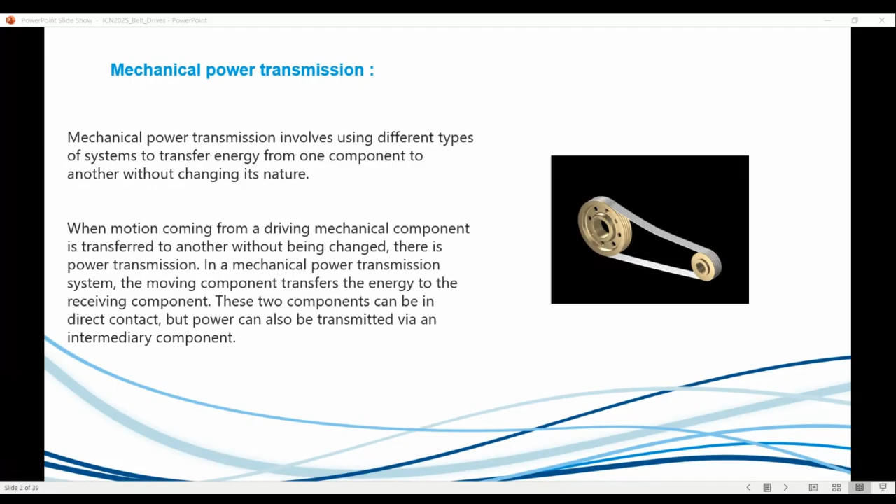Before we start with belt drives, I just want to discuss mechanical power transmission. So what they say, mechanical power... is she saying something? Ready now? Yeah, that's the best way. Really go over the slides first and then practice the questions. It's literally that simple. Don't make things too complicated.

So mechanical power transmission involves different types of systems to transfer energy from one component to another without changing its nature. That sounds a bit funny. When the motion is coming from a driving mechanical component, it is transferred to another without being changed - there is power transmission, right? In a mechanical power transmission system, the moving component transfers energy to the receiving component, right? These components can be by direct contact or can also be transmitted by an intermediate contact, right?

So we transmit power, right? We want to transmit power from one place to another - this is particularly mechanical power. How do we do it? Of course there are ways that you know, and we can use, for instance, positive drives. We talk about shafts as one way to transmit mechanical power. You can use flange couplings, gears, and dog clutches - that's another way. But let's get into this.

So a typical mechanical drive is bifurcated into two types: the friction type, and your positive or mesh type. Your positive types are like your chain drive and gear drive - shafts are also part of that, and your dog clutches, they're positive. And then your friction type - the friction drive is based on the principle of friction, which means friction types are more likely to slip. Essentially, from the friction drives, the very common ones are your belt drives and your rope drives, right?

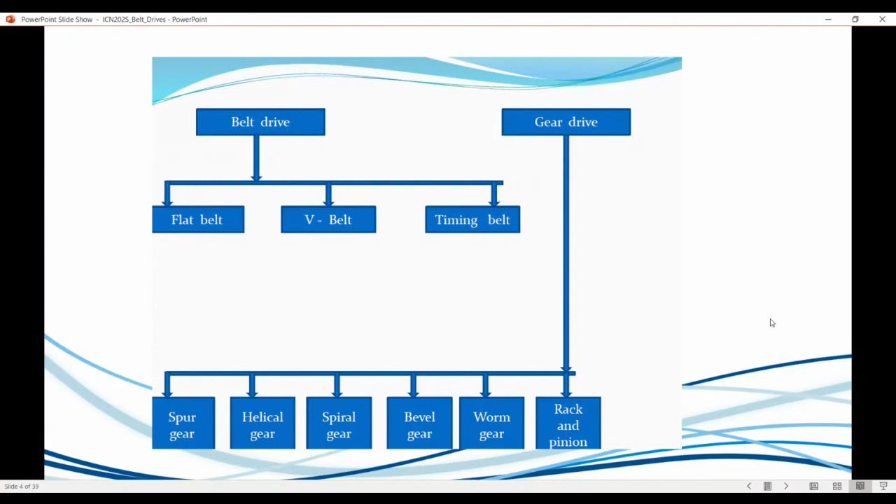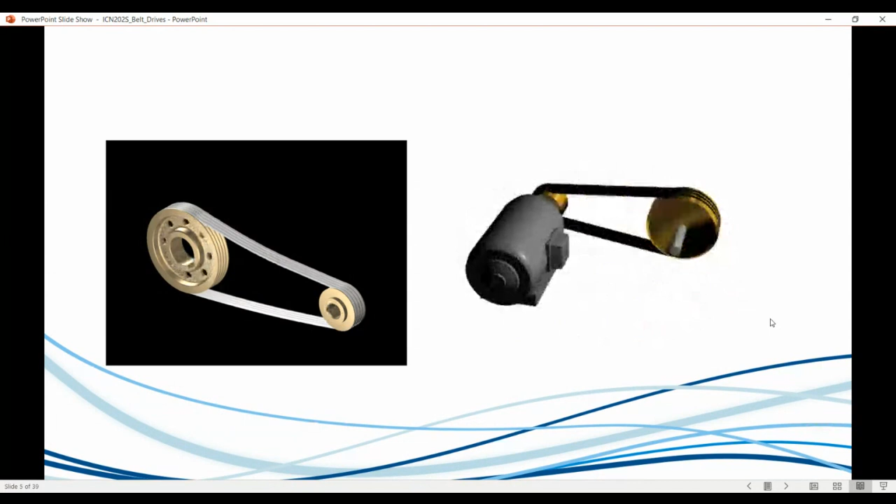It's just showing the tensions, and of course to drive it, and on the right hand side it's the same arrangement, but of course to turn it we need a motor. Turn the driver pulley, and then what we call the small pulley again. Why small? You know, the driven pulley, the driver, the driven pulley. Right? You'll get back to the terminology again.

But the idea is that the motor's transferring power to the small pinions, or arguably pinion, which I'm thinking in terms of gears, and then to the bigger one. Right, so just transmitting power.

It's more into, okay, so different types of belts. Before we actually get into all the analysis, just things that are important to go over this. You've got your flat belt, you've got a V belt, and you've got your rope belt. So those are the 3 things we're actually looking at today.

And they say flat belts are mostly used in factories and workshops. We have a moderate amount of power to be transmitted from one pulley to another, when the 2 pulleys are not more than 8 meters apart. So that's very important. So if you ever want to transmit power, you just can't use any belt.

There are conditions. The V belt is mostly used in factories and workshops, just like the one before, and exactly the same. And they say you use a V belt when the 2 pulleys are near to each other. So that's when you prefer to use a V belt compared to a flat belt. Maybe we can find out why.

And of course, you've got your circular rope belt, and this is more interesting. The circular rope belt is mostly for factories and workshops too. Same thing again, we have a great amount of power to be transmitted from one pulley to another, but with the 2 pulleys more than 8 meters apart.

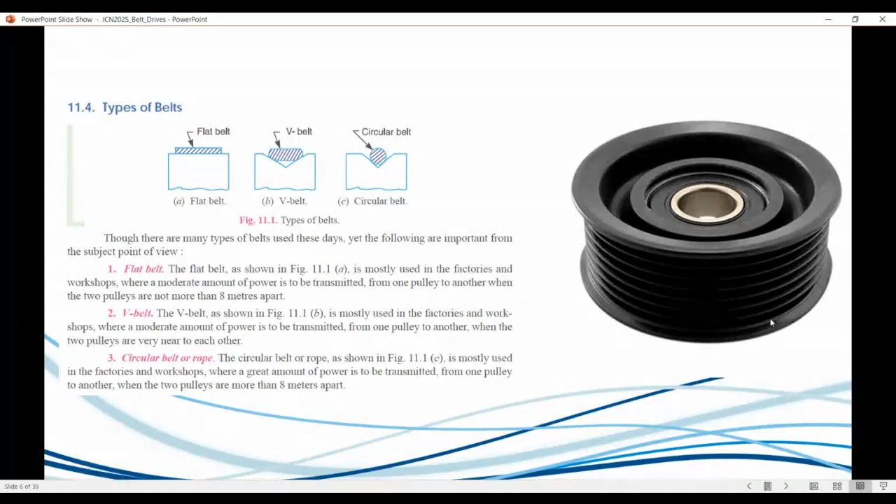Of course, you've just got a typical pulley arrangement in there. Got a pulley over there on the right hand side, it's like an idler pulley. It's got different grooves, and the grooves are there so that it can grip on the belt. It's just a side picture there.

For the materials, this is really just for information's sake, nothing worth going into detail. It's normally leather, rubber, canvas, or balata. But the idea is that it's all to do with having a good coefficient of friction. This is just also for more information's sake, I will not ask you what types, but just what type of material. The idea is where this all ties in is that it's about the coefficient of friction. You want something with a good coefficient, right?

Let's look at the advantages of using belt drives. They are easy to install and remove, as anyone who's done basic car service would know. The price of belt drives is low, that's true. They're simple in construction, maintenance cost is low, and no additional lubrication is required, unlike gears which probably need lubrication.

Power consumption is low. What they probably mean is that the mass moment of inertia of the system is low. When we talk about gear drives, gears, and even clutches, have a big mass moment of inertia, so it takes more energy to rotate.

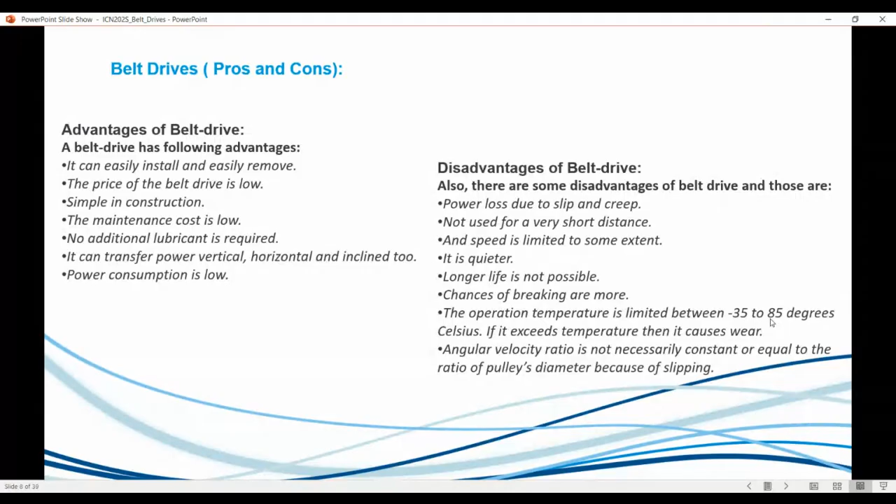I'm sure you're aware that the linear velocity, even though the angular velocity is not constant depending on the diameter, the linear velocity itself is also not actually constant. That's because of slip.

Now just comparing to other systems. The main elements are slip, suitability, and space. Belt drives have pulleys and belts, and slip may occur, unlike chain and gear drives where there's definitely no slip. Belt drives are good for large distances, but of course it depends on the setup. They require large space - it's the simplest system actually. Failure of belts does not occur severely.

That's a very important concept with belts. When a belt breaks, it doesn't cause severe damage to the machine it's transmitting power to, but with a gear drive you can end up with several problems. So that's a nice thing about belts - it doesn't affect other components. Life, in comparison to gears, is less - it's going to break quicker. Installation cost is less, and it's used for low velocity ratios.

The faster you want to go, ideally you want to use gears, and that comes down to centrifugal force. When you're spinning something, you get an extra force acting on the system.

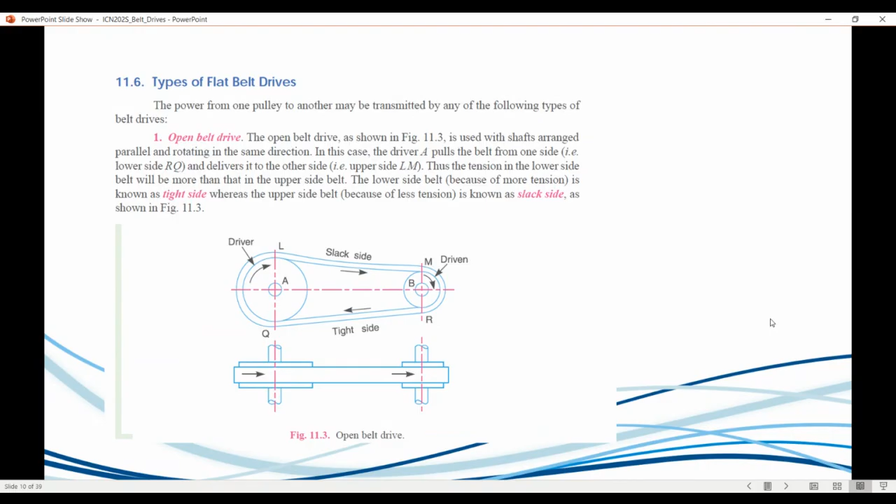And then we're going to set up a cross belt drive for whatever that is. So that's also a very interesting thing to kind of identify which type of belt you should use.

There's also other types of belt drives. Unfortunately for us, we won't be doing any analysis on this. So you've got your quarter turn belt drive, which was more for incline purposes. And we also have a belt drive with a single idler pulley. You might see that, it's not something I'll always bring up. Basically, the angle of the idler is going to increase the angle of lap. We might do an example of that, but I'm not really focused on it.

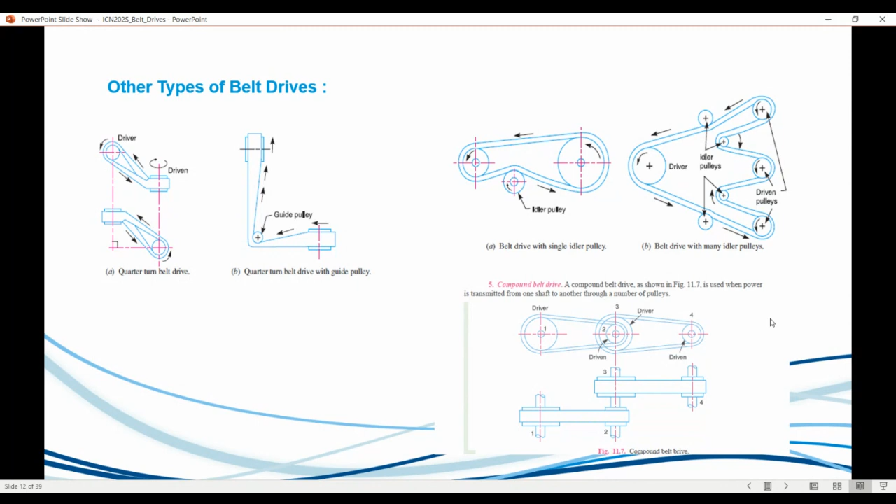And of course, we've got one of many idler pulleys, it's really sophisticated. Then we've got a compound belt drive. We have a driver, there's 3 shafts over there. I'm not particularly sure why one would want to transmit power like that, but okay, it kind of shows you at the bottom. Essentially it has 2 belt drives parallel to each other.

All right, we're nearly at the example. So, velocity ratio of belts. This is something familiar to you.

What you basically assume is that the linear velocity is exactly the same on the drive and the driven pulley. Show you the relationship pi dn, or pi dn over 60. The idea is that you make that equal to each other, and then pi divides out, becomes 1, and then you have some kind of ratio. So without slip, the velocity ratio, the rotational speed N2 over N1 equals D1 over D2. You could call D1 the driver and N2 the driven. But now it's important with belt drives, we have to include the thickness of the actual belt, because that adds to the dimension of the actual pulley.

Now, this is not always the case. I think I probably have a small example for that somewhere here, but I can't exactly tell you how much percent it is. To be honest with you, it's arguably negligible, but I might do an example to illustrate, or show you an example just verbally. But anyway, we do consider it to make the results more accurate.

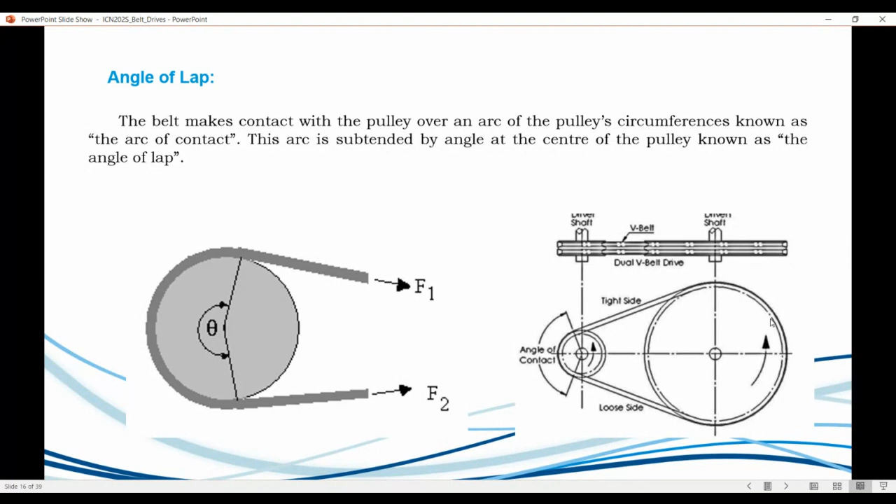So that angle over there, basically where the pulley is, around the circumference of the pulley, the belt surrounding the pulley, that is going to be the angle of lap. You can see on the right hand figure over there, it's exactly the same. That's just angle of contact, angle of lap, same thing, just to make you aware of this terminology.

Again, with open and cross belt, there are more formulas, so total angle of lap and the length. What's important to note here is that, let's say in an open belt drive, the diameters of the pulleys are not the same, the angle of contact of the two pulleys are not the same. So what we tend to find is that the angle of contact on the smaller pulley, which is now D2, is less than 180, as compared to the larger pulley that's greater than 180. So what's important about that is that slip will occur first on the smaller pulley.

When we're doing our analysis or calculations, we always have to use the angle of lap on the pulley, because slip occurs there first. If slip occurred on the driven pulley, then we don't have the angle of lap. So let's just get more information there.

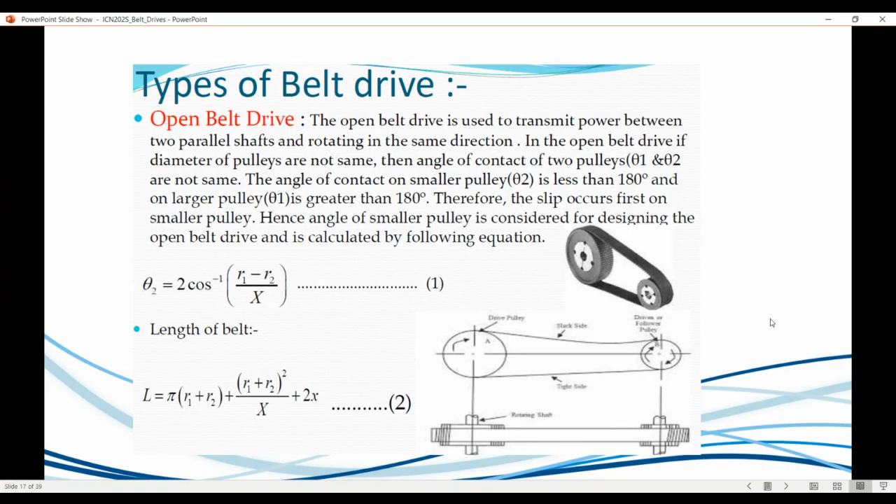So that'll be negative. Theta equals 2 arccos R1 minus R2 divided by X. X is the total distance between the two shafts. You'll get that. I didn't actually mention the variables, but yeah, it's fine.

For cross belt, again, the same thing but two different directions. Same as before, the belt crosses each other, and there is a lot of wear and tear. This type of drive should be used for larger distances between two shafts and for lower speeds. In this case, your angle of contact for both pulleys is the same, even when the diameter is not the same.

So here you can just find, it doesn't really matter which one we have to use. You can just find the angle of lap for this, and then we can get that. All right, so here we go.

So is there any questions so far? I think that's a lot of information, but is there any questions? Any unclarity?

Students, they're still sleeping. Brent, Mr. Silver, Ivano, Matthew, Doyle, there you go. Tommy, you guys awake? Yeah, thought so. No, I'm awake. I'm awake now, yeah. Great, okay, no, just information guys, just relax, I'm nearly there. Yeah, it seems like I'm not nearly there. Oh well, no, I am.

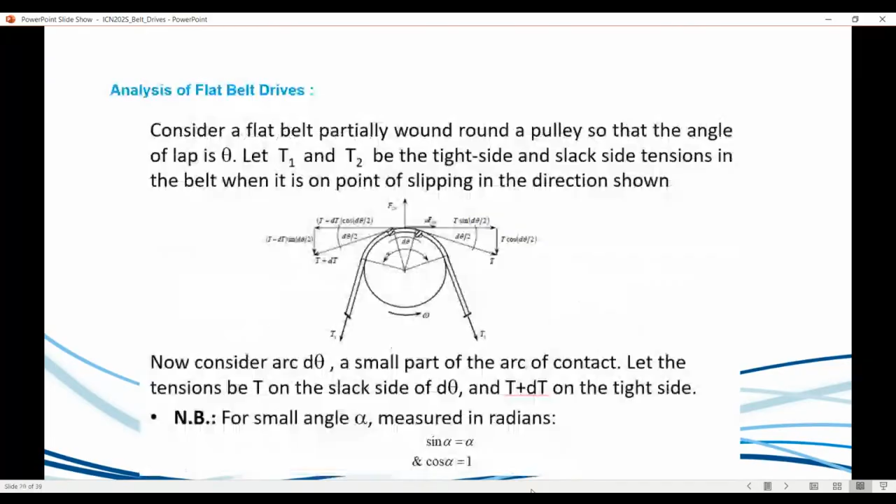But the idea is that you look at all the radial forces, forces to the left and right, the horizontal, and we get the tangential force, which is all the vertical forces. And of course, that will give you, in this case, the frictional forces, the tensions at this particular angle on the one side. Just basically considering a small angle, we're going to end up with that model over there. So that's a very important equation.

The tension T1 over tension T2 equals Euler's number E raised to the coefficient of friction times the angle of lap. All right, very important.

But now, because we're dealing with a rotating system, you've learned of a new force. The centripetal force, or centrifugal force, which will be the inertial force of the centripetal force. We have to take that into account when we're doing analysis. So what does it say? This expression, the one above, does not take into account the centrifugal tension. For low belt speeds, Tc, which is now the centrifugal tension, has little effect on the power transmitted.

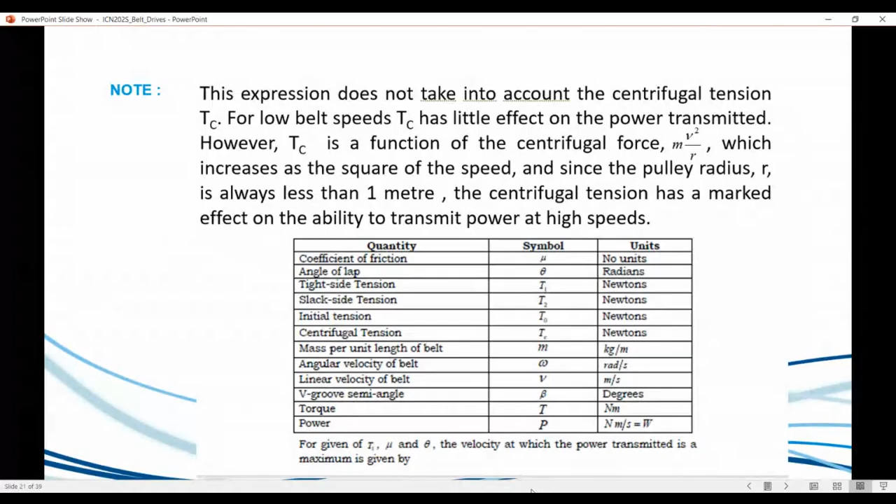So what do we basically do now? Let me go back to the same model: T1 over T2 equals E to the power mu times the angle lap. All we do is subtract Tc from both T1 and T2. Very simple, we're just adding that now. To compute the centrifugal tension, it's basically mass times velocity squared. I'll come back to this because what's supposed to be here is a power theta.

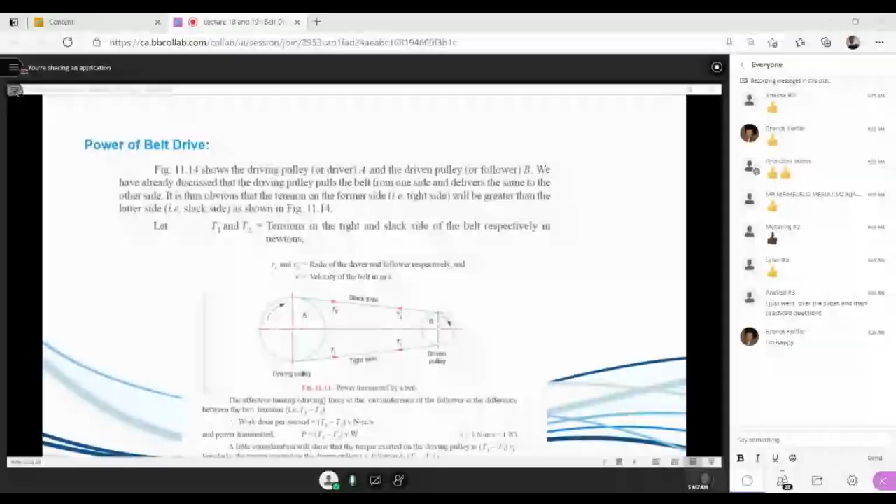Sorry about that. So what's important here is the power. As marine mechanical engineers, you always want to talk in terms of power or watts. So what happens here is we're getting torque, and we normally multiply it by omega. In this case, we can just go force times velocity. This is a nice illustration again.

So we have the driving pulley and the driven pulley - no, wait, what's driven? The small one's being driven in this case. I'm getting a bit confused here. Nevertheless, to find the power - so the driving pulley is the bigger pulley here. Just bear with me until I get all that in order.

As it rotates on the top side, you get the slack side - there's lesser tension compared to the bottom side, which is the tight side. Essentially to find the power, that's going to be the difference of T1 minus T2 times the velocity, which will be your linear velocity, and that will give you your power.

Okay, so just to recap all of this, what's important here is your new model for calculating the tension in the belt. So T1 over T2 equals E to the power mu times theta, and that gets now modified with centrifugal tension. So we have T1 minus Tc over T2 minus Tc equals the same on the right-hand side. And of course, what we have to do now, same with our power.

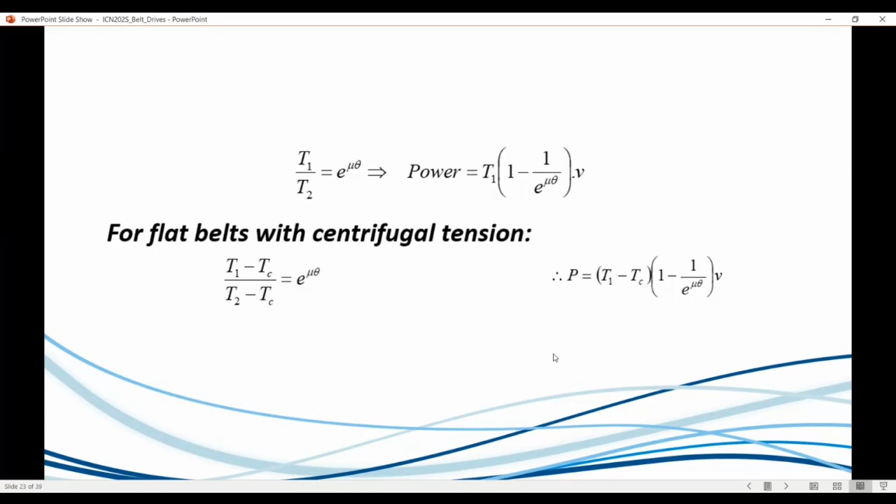Let me just quickly show you how this is a convenient form to use, which you kind of use a lot. So we said power - I hope you guys are finding this color okay. I never talk this much, you guys. We normally do an example, but it's fine, it'll all be worth it.

Power equals T1 minus T2 times V. I'm just illustrating to you how we get this formula. So T2 would be - so T1 equals T2 times E mu theta, and then we divide this out, and then we have this. So T2 is equal to T1 over that piece there.

Just want to move on. So power equals T1 minus, substituting that in, T1 over E mu theta. Just a quick illustration. Of course, we can take T1 as a common factor, so we have 1 minus 1 over E. This is normally a convenient form because all you have to do is basically find your first tension. Sometimes it's given, sometimes you have to work it out, and you go 1 minus that.

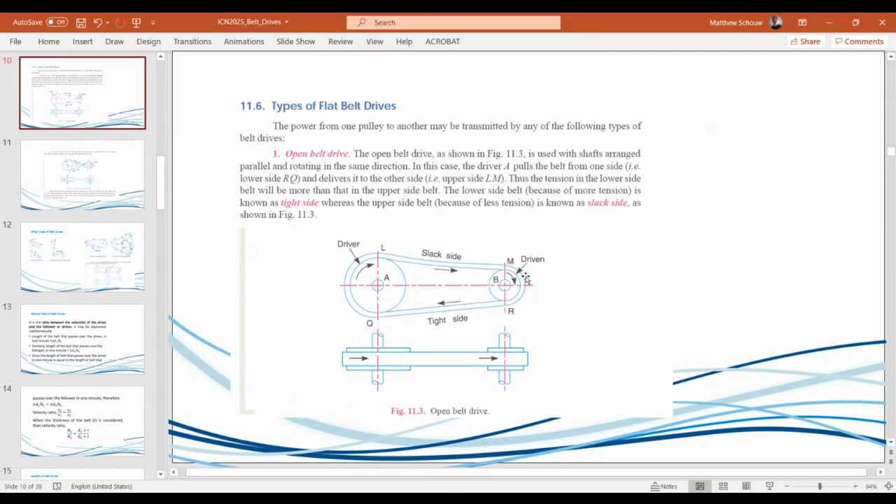So the big one is the driver pulley and the small one is the driven pulley. I'm not sure why I would think it's the other way around, but let's go with big is the driver and small is the driven one. We'll just keep it like that for now, and you'll figure it out.

I just lost my train of thought. Okay, so there's your first example in the book. I'm just opening my whiteboard. If you have your formula sheet next to you, I recommend getting it out, because that's your bread and butter. All you have to learn from this section is how to apply the formulas. It's really a nice section if you understand what's going on.

I give examples because it's easier to express oneself with examples versus words. This is the first example, on 512 in your notepad, and it comes from the book. I'll show you the stuff here. You need two questions, right?

Question: two pulleys, 450 millimeters and 200 millimeters in diameter, mounted on parallel shafts 1.95 meters apart and connected by a flat belt. A) Find the angle of lap between the belt and each pulley, and the length of the belt, if motion is transmitted by an open belt - so we know what an open belt, flat belt, open type arrangement looks like. B) How much power can be transmitted when the larger pulley rotates at 200 revs per minute, if the maximum permissible tension in the belt is 1 kilonewton and the coefficient of friction between the belt and pulley is 0.25. Then repeat exactly the same for a crossed belt.

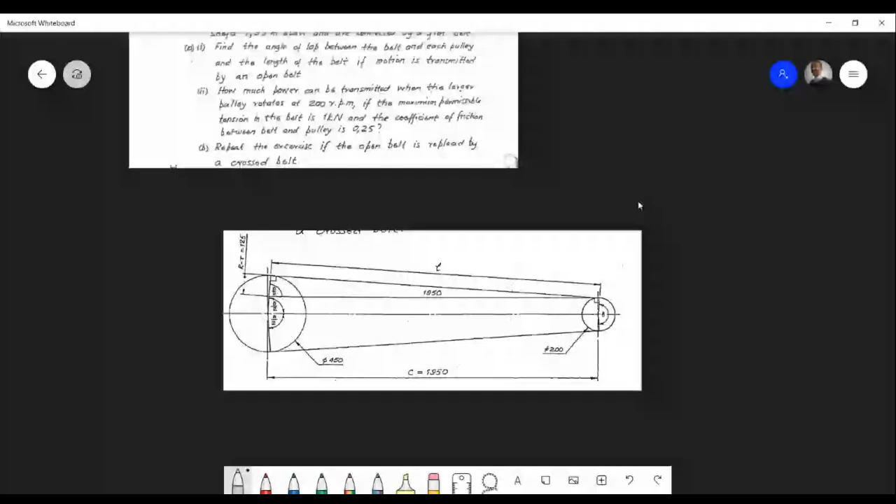Okay, so this is what our arrangement will look like. There's a picture here. So we've got a big pulley, so-called the driver, and the driven pulley. We've got the center distances - that's very important - and we've got the diameters over here.

So like I mentioned to you, our objective for this particular problem - I'll back up now - is A, the angle of lap, and the length. So conveniently for us, we've got the two formulas there.

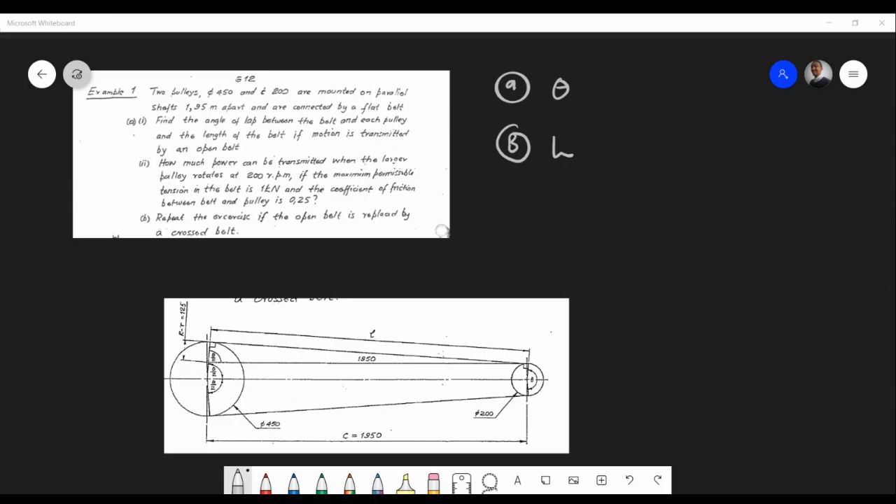Where are they again? So this should be negative. You need to know how to use each one, essentially. Okay, so that's for the length. Of course, for this, we have to use the other one again. Let's snap that also - fairly easy.

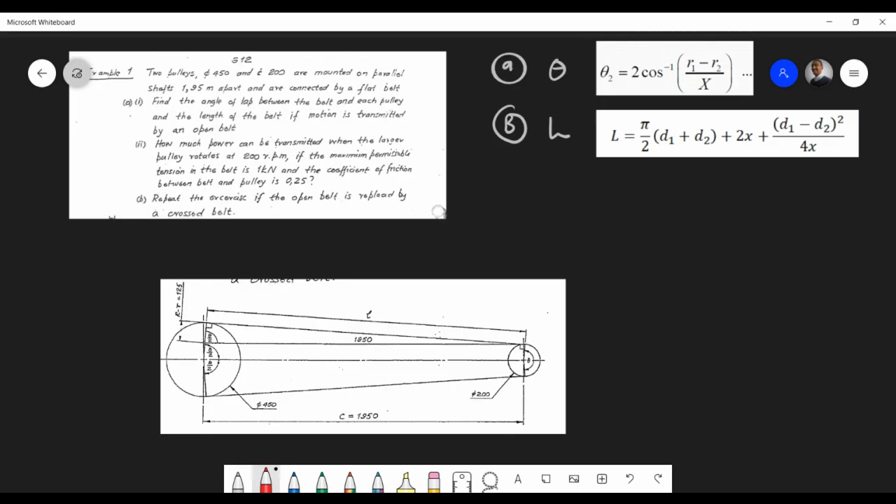Let's just quickly look at what's happening here. Alright, so simple, right? Plug and play. So just for understanding of how it all comes out. Remember I mentioned we have to use the angle of lap on the smaller pulley - slip is going to occur here first. So we're always looking for theta.

Whatever theta is, theta, what we're looking for is that. So how do we find it? What they actually do here: if we have a right angle triangle essentially, and we use the distance of the driver pulley - it's going all the way up - and then we subtract the distance of the smaller one, which is that over there, and then we're left with this, the radius of the smaller one, which is that. Then we're left with r minus r.

Simple tricks again. So it's opposite - sorry, this is my adjacent side. Adjacent is over here, hypotenuse is over here, right? So, but of course this is only half the angle on the other side. So what it actually looks like is we can have it like this.

So let me just shift to A. Cos... what am I doing here? So it's cos theta over 2. Remember, it's always going to be the smaller one anyway. Then that's going to be big R minus small r over C, or Cx, all the same thing. X is just the distance between the two shafts. So to find the angle of lap...

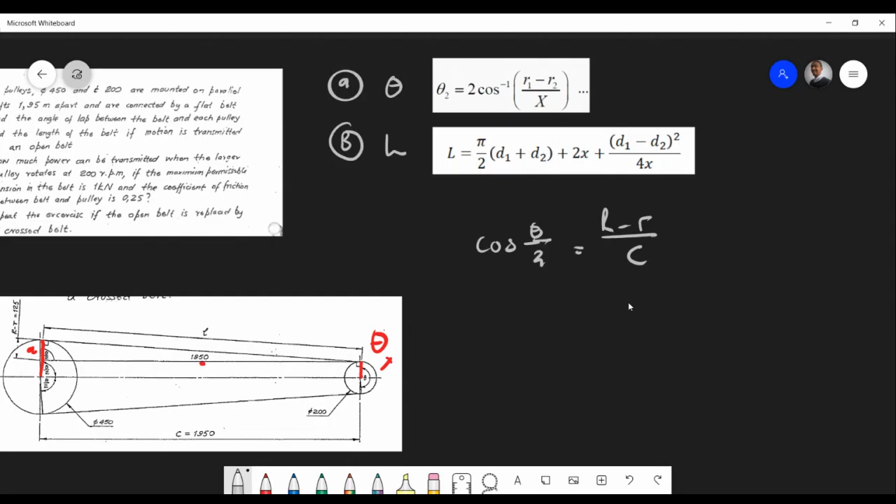Just give me a second. We can use the radiuses, radii, of the two pulleys.

So the first one, that's 450, divide that by 2, you get 225, I think. Minus the smaller one, that's 100. And then it's divided by the center distance. So that's going to be 1.95, right?

Remember what's important is this is only for an open belt, right? If you deal with a cross belt, the formulas look the same, but a few signs are going to change. Just be aware, so know what to use for what particular situation.

All right, so can we just quickly compute that? That's 64.102. Are we allowed to do that? Am I on the right track? I feel like I'm off somewhere. What's my angle? It's 1.95. What am I... I feel like I'm looking here.

Just to see, just give me a second. Oh, I see. Just bear with me. She's supposed to be in millimeters, that's why. So that's what it is. Okay, there we go, got it. I'm using all in millimeters, and we should get 86.

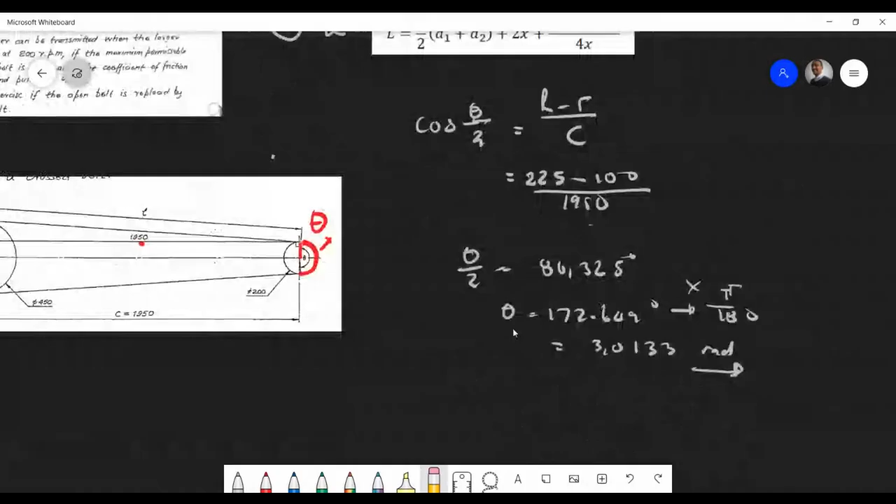Okay, the next thing is to find the length, right? So now, yeah, I gave you a nice formula. Fortunately for you, you could have done it the other way, and the other way is essentially looking at... I just want to show you, so you don't...

We take, we add this length from here to here. So we have this length from here to here, the length of the belt here to here, there to there, and then we add on the driver pulley, and then over here we add that length from here. So of course this is going to be S equals radius times that. That's also S equals radius times that, and of course here we have the two lengths, so I think that's 2L.

So one way of writing it out, and I'm not using the formula now, it's going to be length equals 2 times L, plus R times theta, which is the small side, plus big R times 2 pi minus theta, which is of course 360 degrees. So just looking back at this, so it's the length here, 1, 2 for the top and the bottom. The smaller pulley, of course, that's R times theta, which I've done there.

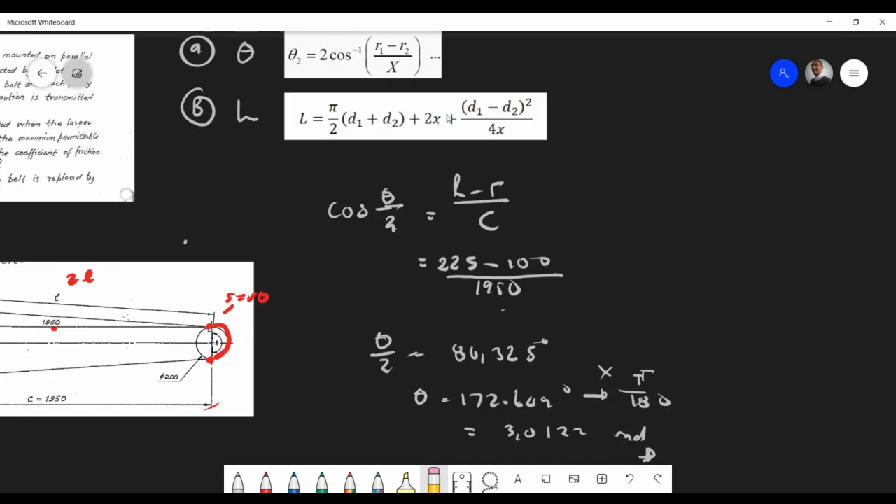And of course on this side, because we're looking at this angle now, we have to say, of course, 360 minus whatever that is there. So that's one way of doing it, right? But simply what I find acceptable is you can just use this value, which is essentially the same thing as this over here. So I like you guys to find the length of the belt for me. So of course over here, that's your two diameters, and that's your X, which would be your center distance, C or X. Depends on what you want to call it, C or X is perfectly fine with me.

So can you just quickly find the length? So you have the two diameters, you've got X, which is the distance, and let's see what you get for your length. Let's see what's close enough to what they have over here. Okay, I'll give you guys like 2 minutes to do that.

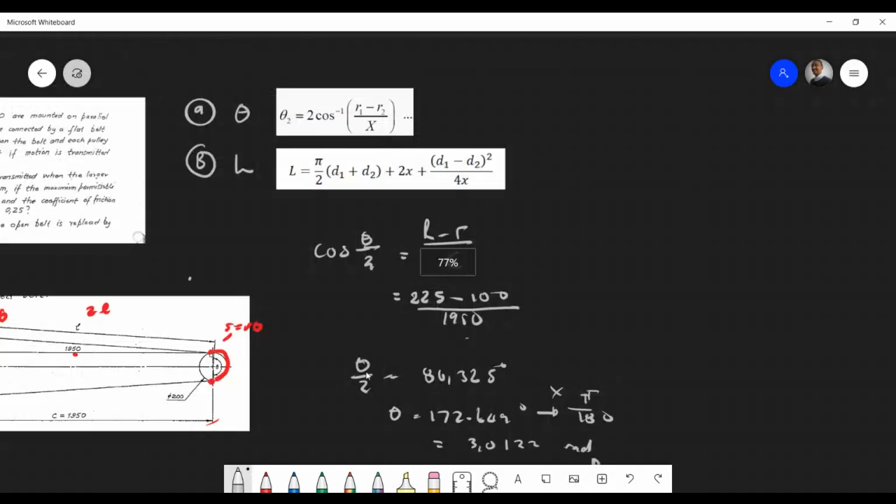But what I want to touch on now is where we need to get the meat and potatoes of this thing. So at number 2, I'm labeling this A and B - not the correct labels, but let's just get it right. We get the idea here. Number 2 is how much power can be transmitted with a larger pulley.

It's telling you it rotates at 200 revs per minute if the maximal permissible tension in the belt is 1 kN. So where we're heading is power equals T1 minus T2 times velocity. We can change this up and say T1 times 1 minus 1 over E mu theta, times velocity - force times velocity, if you're ever wondering what's happening.

Of course, what we need to do now is find the individual things, the velocity and that value. So what we normally do is say T1 over T2 equals this. If you want to do this, T1 over T2. So we know E, what's our coefficient of friction? I think it was 0.25. And our angle of lap we've worked out, but remember it must be in radians, and we have it in radians, and that was 3.0133.

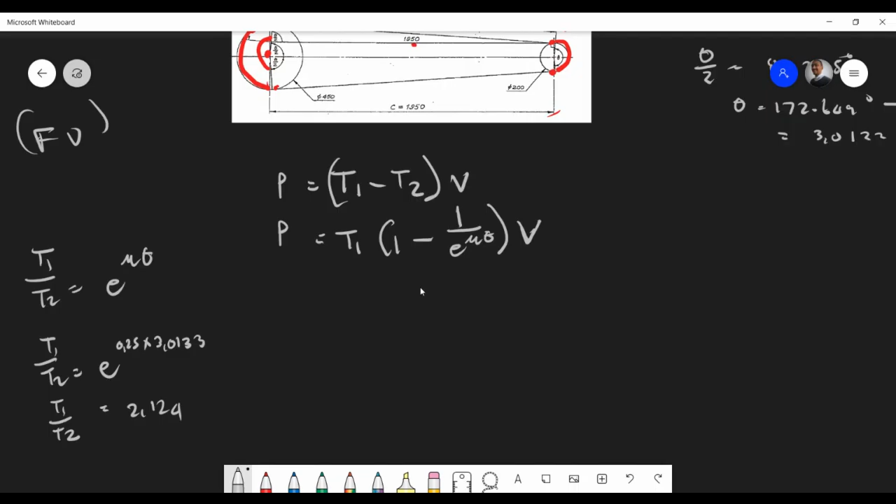How do you think? The tension - oh, they say the maximum. They really want the power. There's nothing else to want. So now they say the maximum tension in the belt is 1 kilonewton, and of course that's going to be on the tight side. So it doesn't really matter where it's rotating in this case.

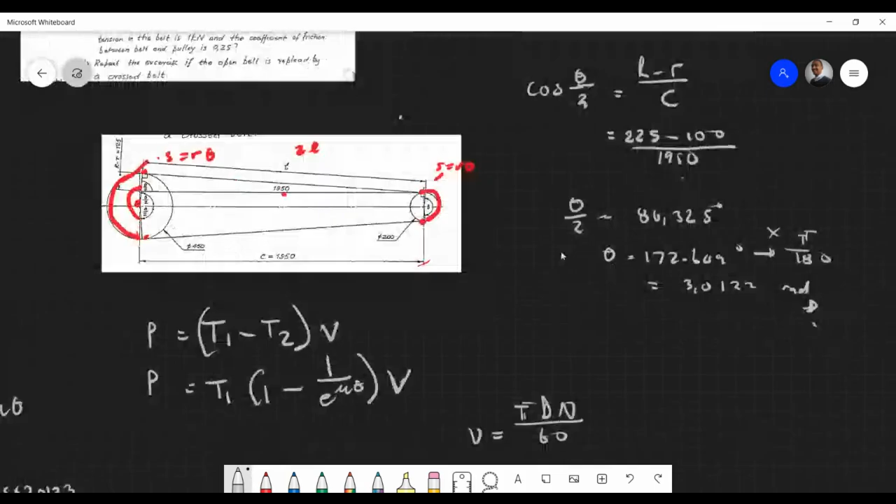But all we have to do, and what we're missing here is one more thing, and that's the velocity. Let me just write the velocity here. So we of course know pi d n over 60. So it's pi times - they said the larger pulley is rotating at 200 revs, and that's at 450 millimeters, over 60. And then we can get our velocity. We can quickly do that. Wait, give me a second.

Something is - oh, times 10 to negative 3. So pi times 0.45 times 200 over 60. That's 4.712... 2.3, right, or 2.4. Acceptable, that's acceptable.

So we have that, so we say P equals - T1 will be, like I said, the maximum permissible tension in the belt, which will be on the tight side. So let me just quickly erase this. And so if this is rotating this way, this becomes your T2 on top, that becomes T1. And this is rotating, omega is going to be at 200 revs per minute. Okay, so T1 is equal to 1 kilonewton, so that's 1,000.

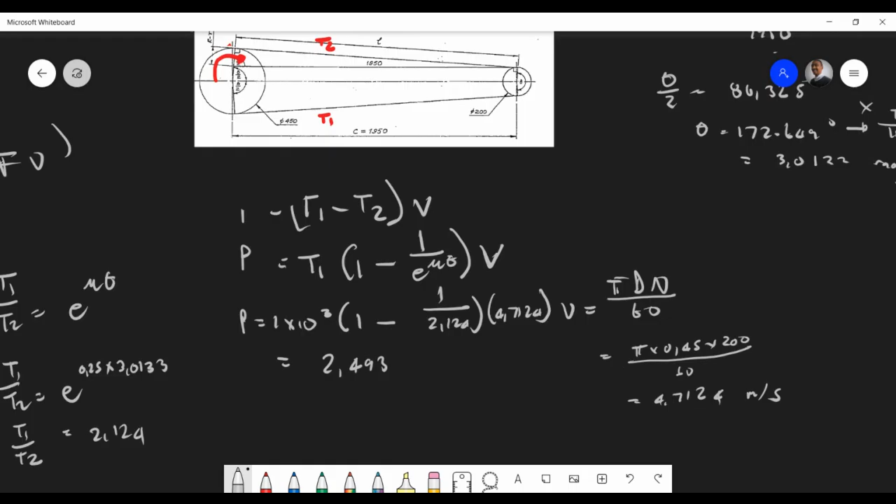Oh, sorry about that. Is it the power? Yeah, 2.4. Yeah, thank you, Mr. Kiva. 2.493 kilowatts. I'm just missing something here. Yeah, 0.75. Yeah, around here.

So like I said to you, you could have also done power equals T1 minus T2 times velocity. So if we do want to find the tension in the slack side of the belt - someone said something, yeah, it's fine, it's close enough, but I know it's 3 more, yeah, I got the idea. It will be simple, and T2 will simply be T1 divided by 2.124. And if you get that, you should get around 471 newtons.

So just stepping back and looking at the analysis, T1 is 1,000 newtons, T2 is 471 newtons, and our total power without slip here is 2.49375 kilowatts. Just give me a second.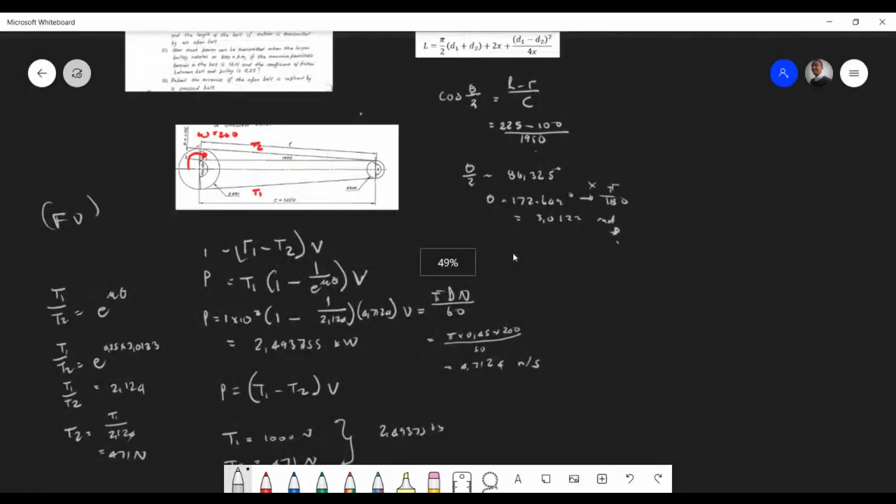So in the next question, part of the question we have to repeat, if this same open belt is replaced by a cross belt, right? So we still have a flat belt, but now we change the arrangement to a cross belt. In a cross belt, the pulleys rotate in different directions. I just want to get that particular image for you guys to have a look at what it looks like. Just give me a second.

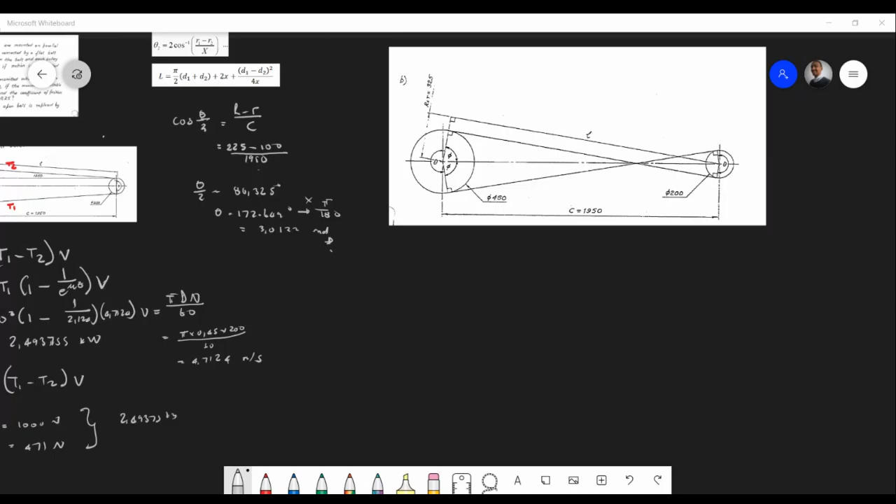So the way you have to think about this is that you must identify what kind of belt it is, whether it's a flat belt, a V belt, or rope, and you have to use the equation based on what kind of arrangement it is. That's very important for this kind of question, or this particular section. So in this case we're dealing with a cross belt, and like I said, the formulas are essentially the same, but just...

Okay, right, so it's the same setup here. So we want the angle of lap here. The angle of lap in this case, our formula now is, theta will equal 2 pi, of course in radians, minus 2 phi. It's exactly the same as this over here. So for us to find phi...

We're going to have to say cos phi is going to be R1 plus R2 in this case, and that is 225 plus 100 divided by 1950. So it's a similar setup.

So if you look at this, just scrolling towards this, we're still using trig, so it's still opposite, sorry, adjacent, which is this. So adjacent will be this whole triangle over here, right, that's big R plus R. And then of course hypotenuse, which will sit over here. So the hypotenuse is basically the whole distance from here to here. Whoa.

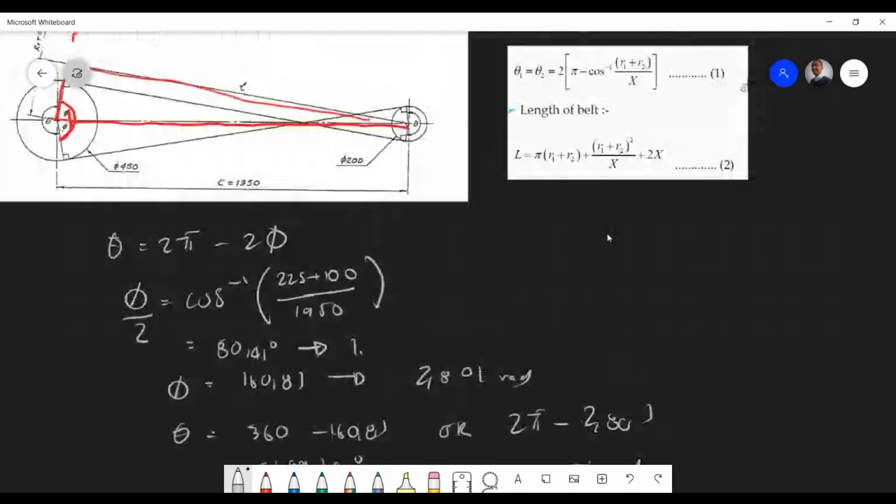And then again, to find the length, so the difference between the cross belt and in terms of the formula, just as a comparison, that one. So of course you have to know this, but I don't actually tell you this. Instead of minus now we add, right?

So we add the distances now, we add R1 plus R2 basically to find the length. So if we do that - I still don't actually do all of this, but anyway. So diameter is 450 plus 200 plus 2 times 1950 plus 450 plus 200, and we square that guy and say 4 times 1950. What is my length? Let's see what we get.

So you can see it's just all knowing what to use in what particular context. It's really not that bad. So now you've learned flat belt, and you've learned cross belt to find the lengths and stuff like that. Okay, is this correct? Do I have this all right here? Did I make a mistake somewhere? I'm not particularly sure what I did wrong.

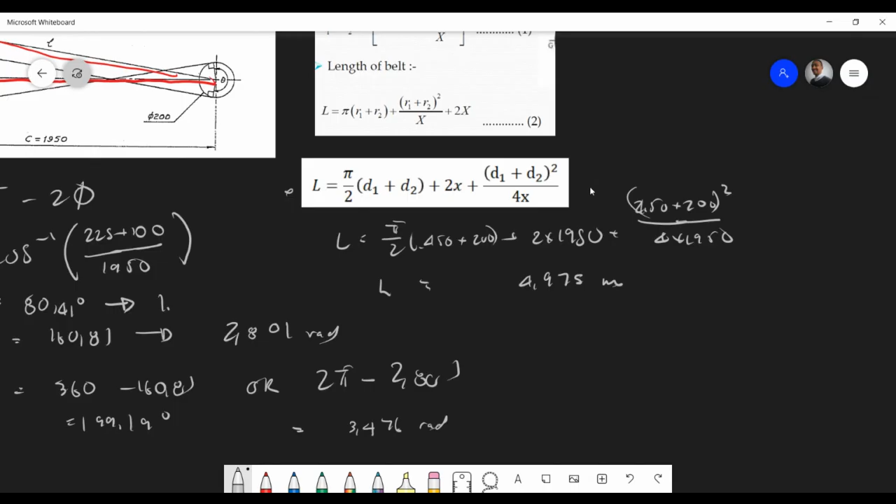Interestingly enough, we also need to find out the power transmitted for this, and it's exactly the same. So yeah, 4.975 on the dot, it's fantastic. We've got the length exactly the same as in the book, even though they use a different approach. So now power equals T1 times 1 minus 1 over e to the mu theta, times velocity.

T1 is still 1,000, 1 minus - but the difference is now our angle of lap, and our angle of lap has essentially increased. And if we plug in, it's 0.25 times 3.476, we times the velocity, and the velocity is exactly the same as 4.712. And if we find power, we get 2.74 kilowatts.

So of course, it's the same calculation, you don't actually really have to do it. But what's important to note is that if you had to use a cross belt for the same kind of arrangement, you'd receive more power. But of course, it obviously depends on application. So if you use a cross belt - and that's for a flat belt, so it's the same formula. Don't worry too much, still the early stages.

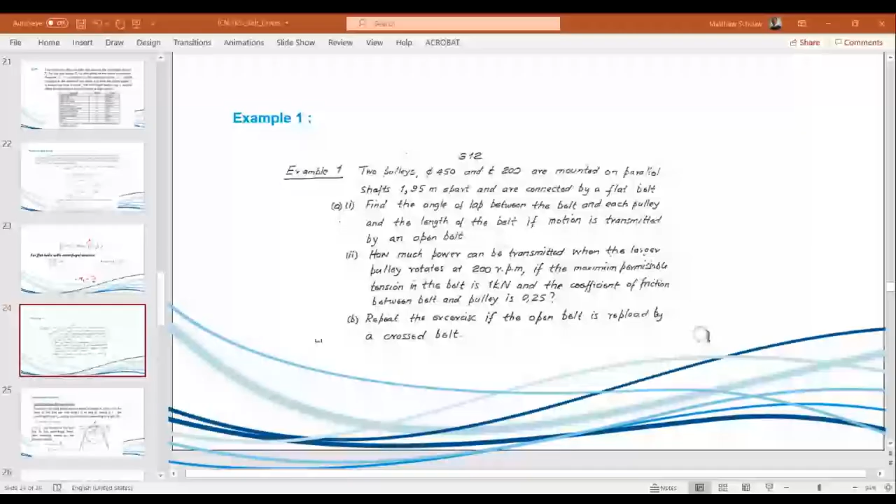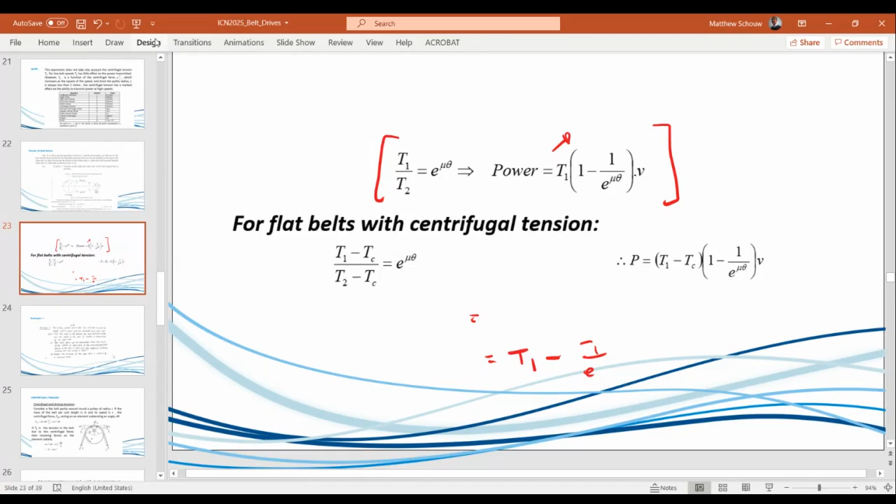Okay, so now that you have a bit of experience with belt drives and did a bit of some analysis on it, I shouldn't go back to the previous slides again. So let's see what we essentially just did now, using this model here to find the tension, to find the power. But now we're going to grow up and start applying the centrifugal tension, which we have to subtract. And if you look at the actual diagram, in terms of centrifugal tension, it acts obviously over here, and we even got a frictional force due to that.

So I mentioned centrifugal tension. Again, this is just the basic analysis - we're taking horizontal forces, the radial ones, and tangential ones, the vertical ones. It's forces up, forces down. In essence, what we end up getting is centrifugal force equals mass times velocity squared. What I find particularly strange is that mass is normally per meter length of belt, kilogram per meter.

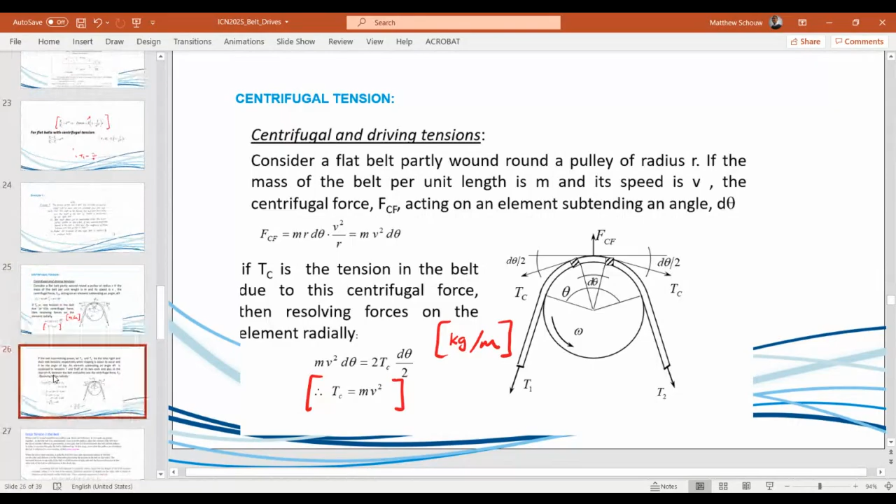So let's say the mass of the belt is per unit length - you always end up finding mass per meter, and we just work per meter essentially. We don't times by the length of the belt. It's again exactly the same thing, just adding all the forces.

Just to look at it a bit more maturely now: we've got RF, the frictional force, plus R, the reactional force, and this is equal to... essentially, like I said, all that happens is we end up with the same formula, but now minus the centrifugal tension. We lose a bit of tension or force due to it rotating.

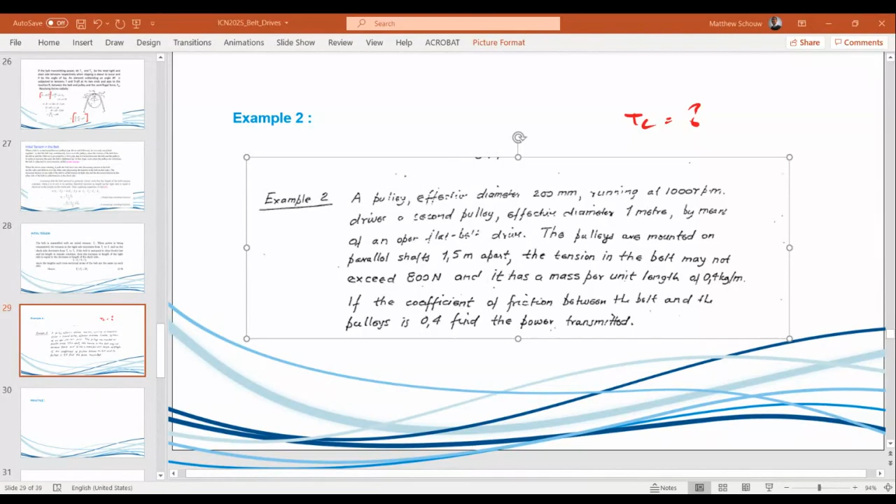I'll come back to this, the initial tension - let's do an example based on this. What's new here is that we've got TC. I'm going to do one example, and give you one to practice with. It follows the same vein, basically the same procedure. What's new here is just the centrifugal tension.

The initial tension part, I'm going to cover afterwards again - so just bear with me, guys. I'll throw it in at the bottom here somewhere, after maximum power transfer. Just give me a second.

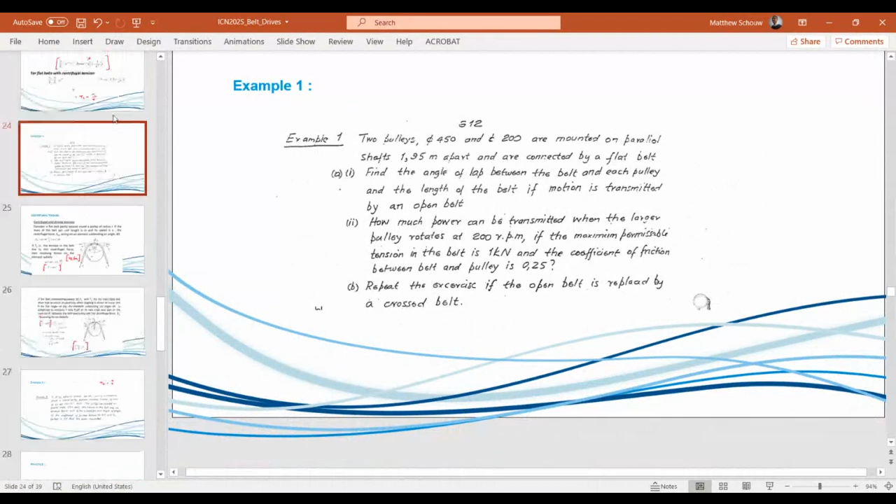Okay guys, so I'm going to show you this example, then give you one to practice, and then we can move on. Let me get my whiteboard quickly. So now we're getting to about 50 to 60% of the way there in terms of how you'll be assessed - like the hardest problem of this belt drive stuff.

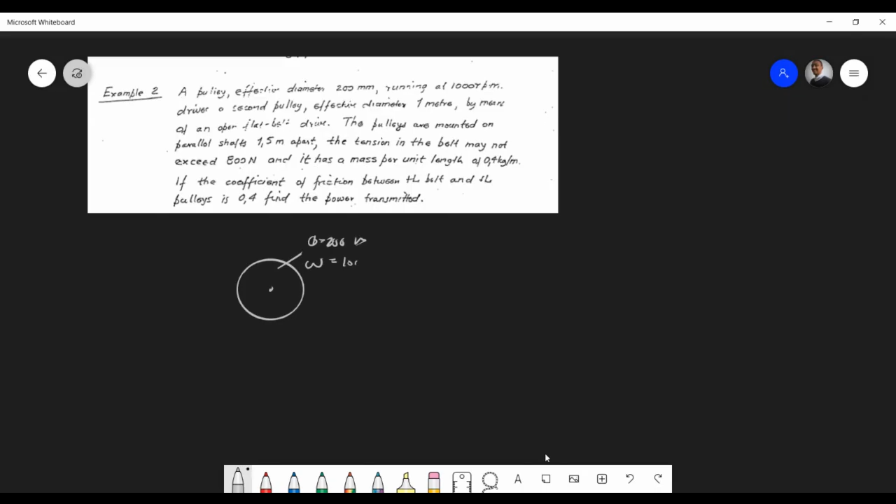So how do we start? We've got a pulley with an effective diameter of 200 running at 1,000 revs per minute, which drives a second pulley with an effective diameter of 1 meter. So can we just quickly get that down - a pulley that's going to be 200, omega is 1,000 RPM, and it drives a second one which is 1 meter.

So you can see it's essentially dependent - just my pulley here, yeah, so this guy's, let's say, 1 meter. They're mounted on shafts which are 1.5 meters apart, so the center distance is 1.5 - that's in case you might need to find the angle of lap.

They say the tension in the belt may not exceed 800 newtons. Once again, assuming it's rotating clockwise, this becomes T1, that becomes T2. So slack side is on top, and we know T1 is the maximum amount of tension, so that's 800 newtons - if we exceed this tension, the belt will snap.

Then it says it has a mass per unit length of 0.4 kilograms per meter - you'll see what I'm talking about. So we know the mass per length. And if the coefficient of friction between belt and pulleys is 0.4, find the power transmitted.

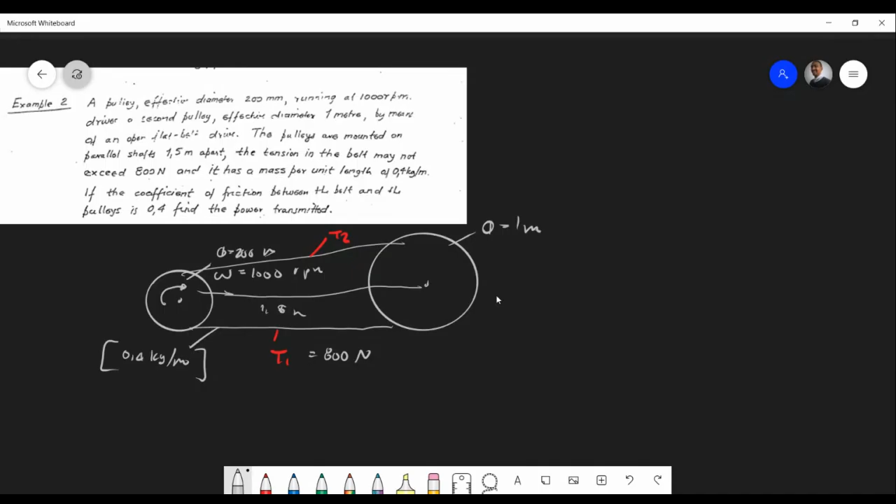So holistically, where are we? When you find the power now, that's going to be T1 minus TC, times 1 minus 1 over e to the power of mu theta, times the velocity.

Remember, this is also just the same as T1 minus Tc over T2 minus Tc equals that over there. So we just make it easy so we don't have to put too many variables over here. But if the question does ask to find the tension, find both tensions of the belt, it would be very important to do that.

So obviously that's fairly easy. Our unknowns for this particular problem are the angle of lap, our Tc, T1 we have, and our velocity we can easily find - our linear velocity of the belt. Now remember, it's not slipping in this case. And when the belts are not slipping, our velocities are equal to each other.

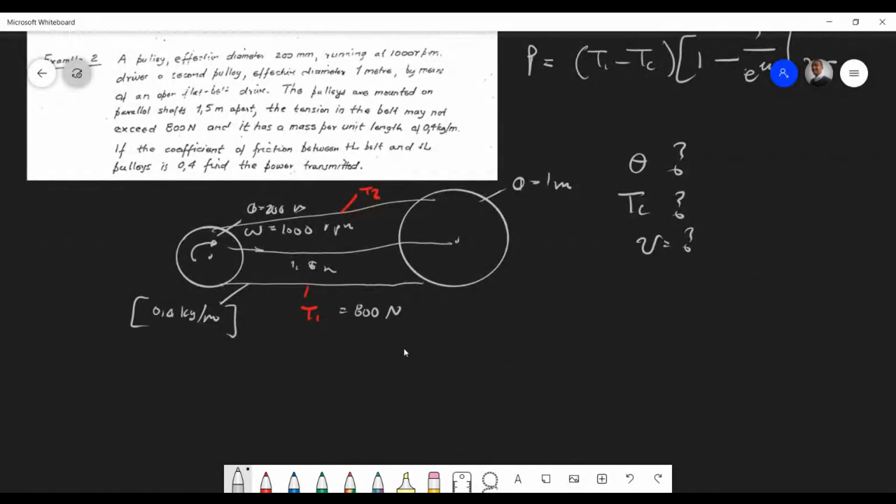But let's start to unpack now. So this is a flat belt pulley. Which formula should we use now to find our angle of lap? Do you remember?

So flat belt, that's the formula. Are we all happy with this? Can you see it's a common way of how we're going to start the problems? You find angle of lap. Sometimes they actually give you angle of lap, so you don't have to find it.

So let's quickly do this. theta over 2 is going to be equal to something over here. Let's just quickly see - so we have 100, oh the big one's 500, right, minus 100 over the center distance, and that's 1.5, 1,500. So 500, big one minus small one.

Of course, this is now - let's say I'll call this - 74.54 degrees, correct? From right there. And of course, you multiply that by 2, and we get 149.06798 degrees, right?

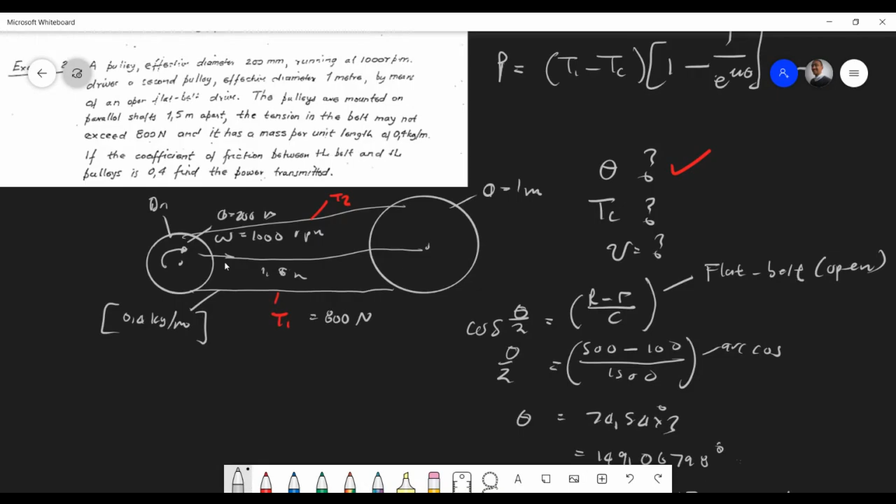So the velocity in this case should be simple. We've got the driver here, and the driver in this case is at 200 millimeters at 1,000 revs per minute. So we can go pi times 2,000 times 1 over 60. We square it. So right.

So guys, I'm making you know, just treat this as kilogram, right? Even though it's kilogram per meter, we can actually find it - we just work per meter. No question really asks you to find the length times by the amount. There's no need. Most of these questions don't require it.

So anyway, we find centrifugal tension - we should get around 44 newtons. Let me just quickly check. So like I said, we're getting there, you're getting a feel of what this whole section is about. Yeah, we get 43.86, that's the exact amount. I thought these values are - can you see it's quite small? So we lose a bit of tension there.

43.865 newtons. Okay, so once we have this, we have to go back to our power formula. Remember, we have to subtract the centrifugal tension - we lose a bit of load there due to the centrifugal force, and that gave us our limit. And I think our limit was given at 800 newtons.

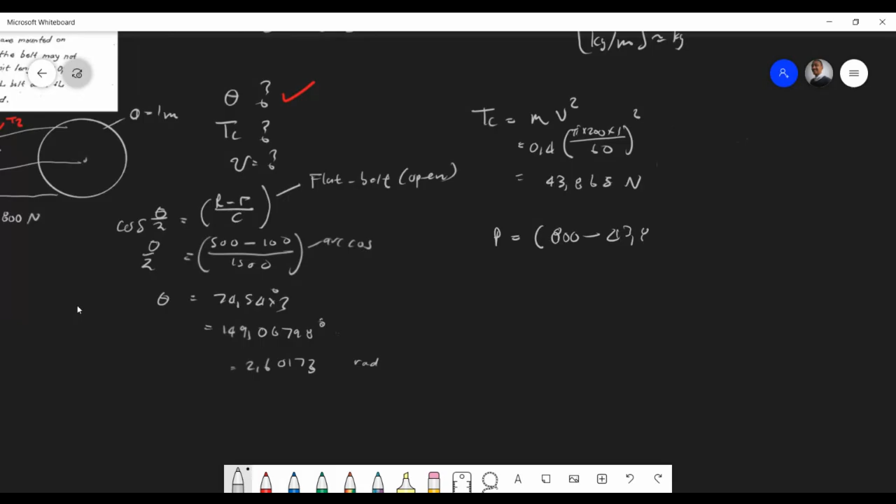To compute the power will be a fairly simple process. We've got the maximum tension that's 800, minus the 43,865. 1 minus 1 over, to be fine, we still have to find all of that, so that's e to the power 0.4 times our angle of lap 2.60173, times the velocity, and the velocity in this case was 10.47 meters per second, and you get 5. Fairly simple guys, I promise you it's a very nice section to do. 5.1195.

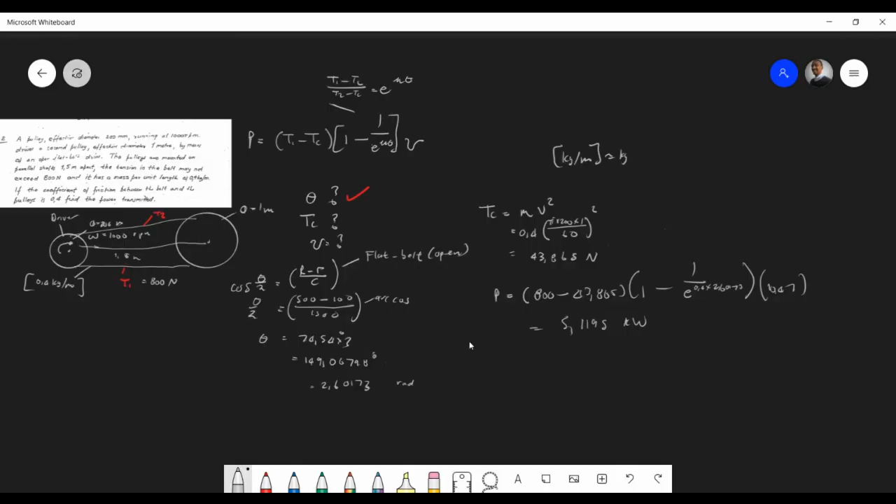I'm just kind of quite sad that I can't actually hear you guys, it's quite weird. Okay. All right, so I've done this one. Time is hitting us here, let me just go back.

Let's go check, so we're just basically going to do another one now. Where am I? Here, it's example 1. For example, okay let me go back to the slides now. Yeah, so I have to go back to the slides here. Okay.

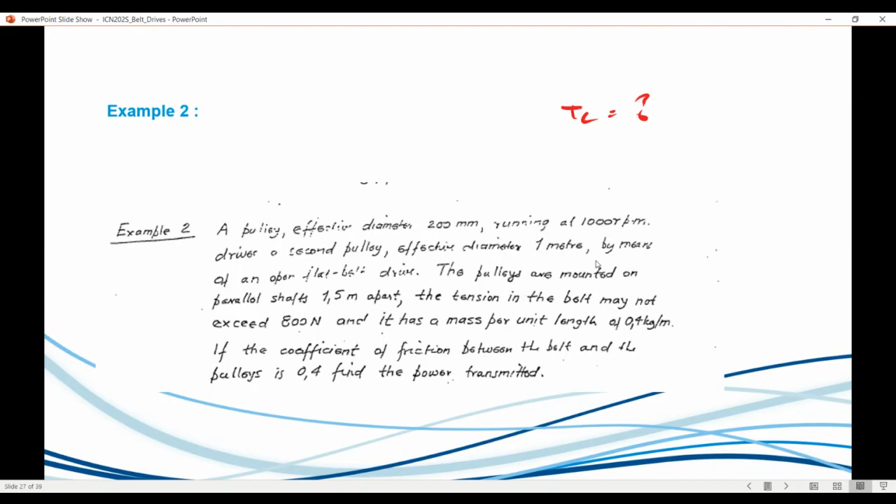Okay, so now we have a bit of experience with belt drives and some with centrifugal tension, a bit of centrifugal tension. And now, also about the pulleys, we're trying to get which one is the driver and which one is the driven. So they will tell you which one is the driver, which one is driven. Let's just look at the previous one quickly. It says the driver, so a pulley with 200, which is the driver obviously, is running at 1,000 revs, drives a second pulley which is 1 meter. You see there, so you've got a small pulley driving a big one. So it depends, it will change on the nature of the question and the context. Of course, with more examples you can actually see this.

So guys, what's also important here is something called the maximum power transfer. Let's just quickly read exactly what's happening here. It states that the tight side tension T1 has an upper limit which may not be exceeded, or the belt will be overstressed. Overstressed means essentially to fail, right? That's what actually happens when the belt breaks. Of course it gets worn out and breaks, but this is okay. In fact what actually happens is on the belt drive itself, as you use it over time, the stresses produced from rotation and of course tensions, the inherent tensions in the rope, produce fatigue within the belt, and then only after a certain amount of cycles the belt will snap. Anyway, nevertheless, so the belt velocity V can be varied while maintaining T1 at this upper limit to some lower fixed value.

Then the maximum power to be transmitted, the differential power with respect to v is 0. So of course you guys always remember, when we're making the derivative 0, we're always finding the maximum value. So if you think about it, just as a mathematical background here, not that I really have to do this, but you know, if we take, hope you guys remember your maths, a simple quadratic equation, if you remember the turning point formula, I think it was x equals minus b over 2a.

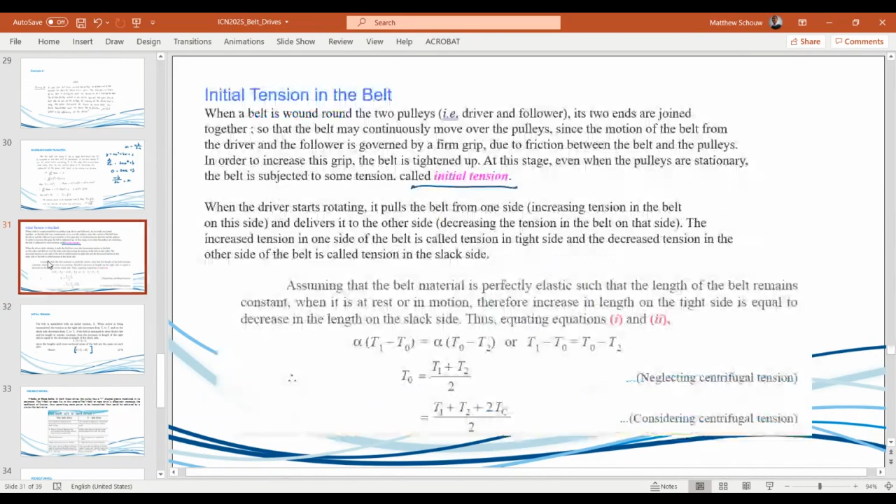This arises from the fact that when the driver starts rotating, it pulls the belt from one side, increasing the tension on that side. If it's on the tight side, we get an increase in tension, and it delivers it to the other side, decreasing the tension there, which is the slack side. The increased tension on one side of the belt is called the tension in the tight side.

The idea is that when the belt is subjected to tension, there will be an initial tension in the belt, and it will basically be the average of T1 plus T2, the average of the tight side and the slack side. And if there is centrifugal tension, we have to account for that too. So this is not always common, but it does come up sometimes.

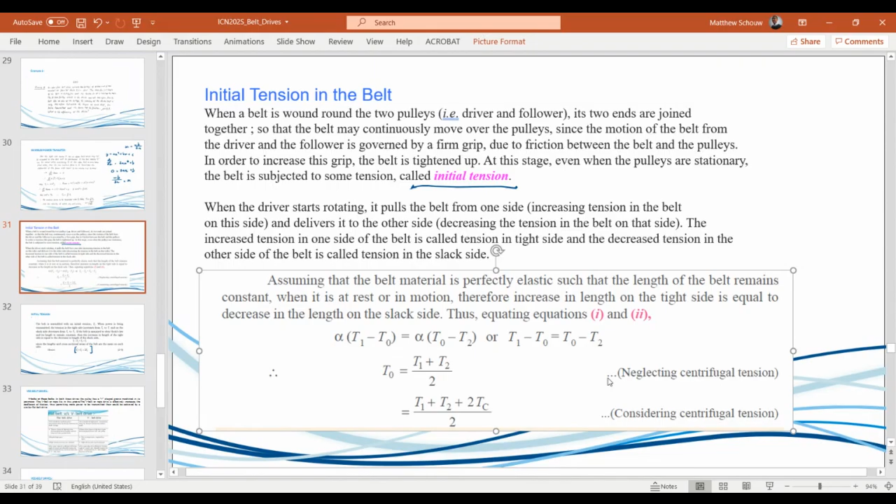And then we can solve more problems now with V-belts, maximum power transfer. That is what I actually want to do. Okay, so let's get example 3.

Where is example 3? Maximum power transfer, initial tension. And there we go. Yeah, I need to just kind of fix up my slides here, I didn't arrange it the way I wanted to.

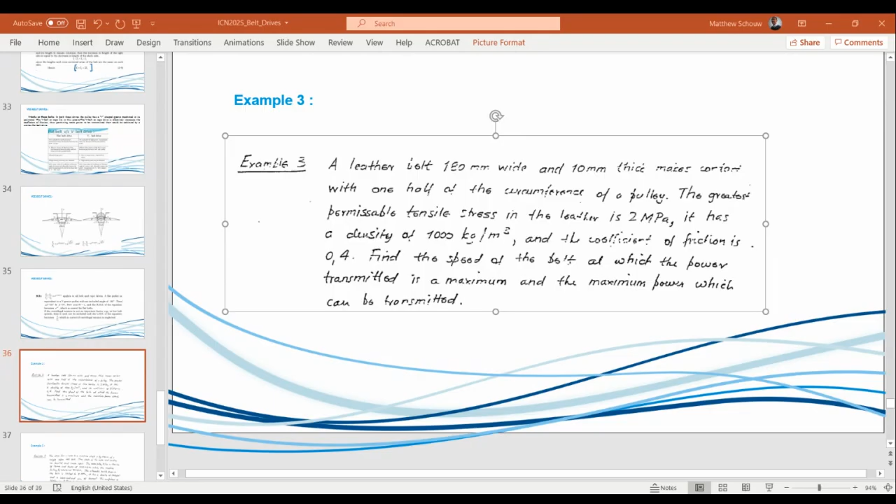Okay, I'm just going to go back to the whiteboard. So just the new thing is that the belt is initially tensioned. Sometimes you account for it, and we've also got a maximum condition in terms of the tension and in terms of velocity. Okay, so we're going to be solving this problem next.

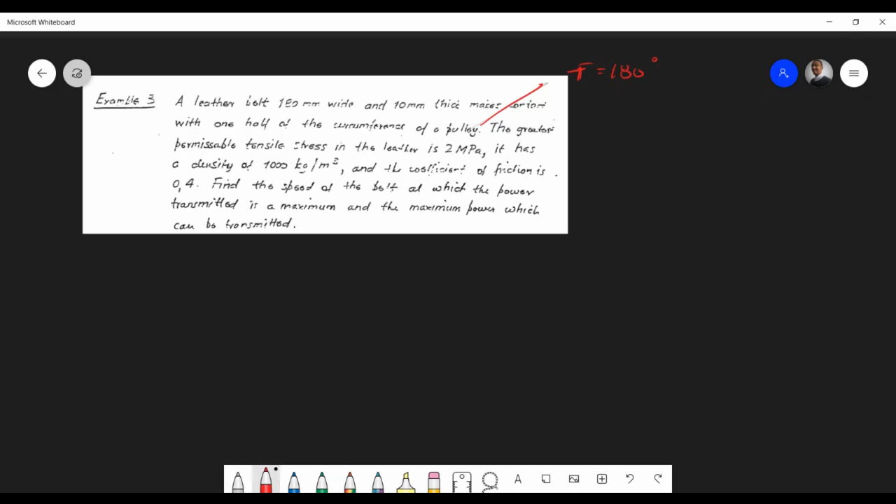Like I said, we know now TC must equal T1 over 3, and this is going to be the velocity. Let me just get this formula in, which essentially will give us the speed. We could just say TC over M, right? We can find that speed. All right, let's get cracking here.

Okay, so first thing we need to find the maximum tension. I like this problem because now you're not actually given T1 and you have to compute it.

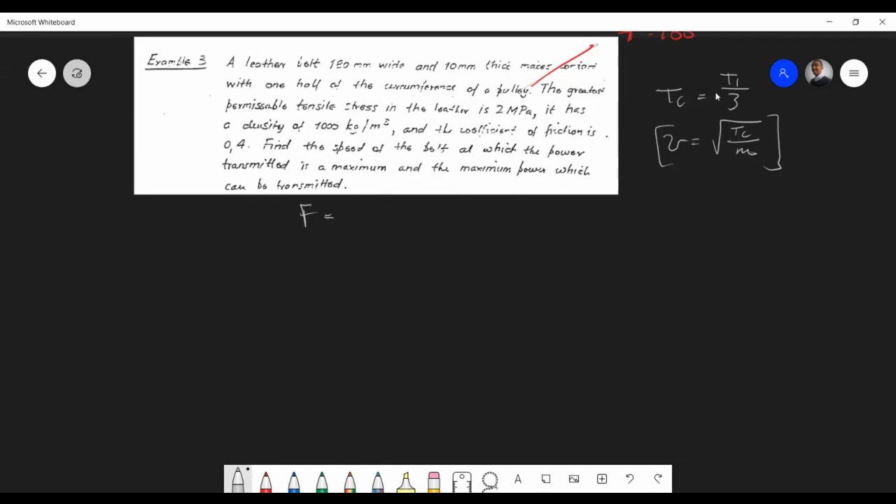We know that force equals stress times area. In this case, we can say T1 equals stress times the area. The maximum allowable tensile stress in the belt is 2 megapascals. Now we have to multiply by the belt's dimensions: 0.18 times 0.01.

What's cool with this problem is sometimes they might ask you to find the width of the belt or the thickness instead. So I'm making you aware they can play around with the dimensions and stress values. Once you find that, you should get 3,600 newtons.

It's a fairly simple problem. For maximum power conditions, we know that TC has to equal 3,600 divided by 3, so T1 divided by 3, and we find out the centrifugal tension will be 1,200. That's the max amount of centrifugal tension we can get.

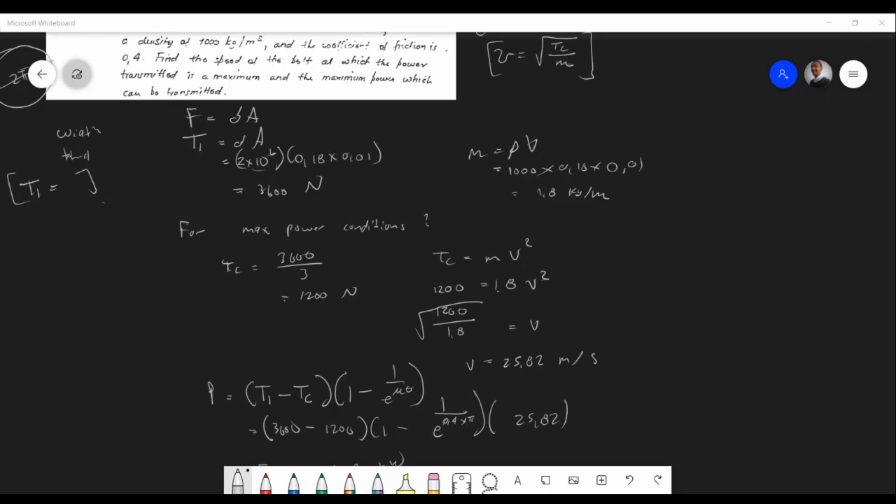Sure, go for it. Yeah, I just missed the angle theta. Okay, so if you read the question, it says with 1/2 of the circumference of the pulley. So that is 1/2 of the circumference. So what's a full circumference? 2 pi, and 1/2 is half of it, right? Which is pi, so it's 180 degrees. That's all, nothing exciting.

Now I want to give you guys a small tutorial quickly. It seems to be tight, but it's fine, no problem. Small tutorial, just a small test to see if you guys are able to do this. I'll give you guys around 15 minutes to complete this one, right? Just move it over here.

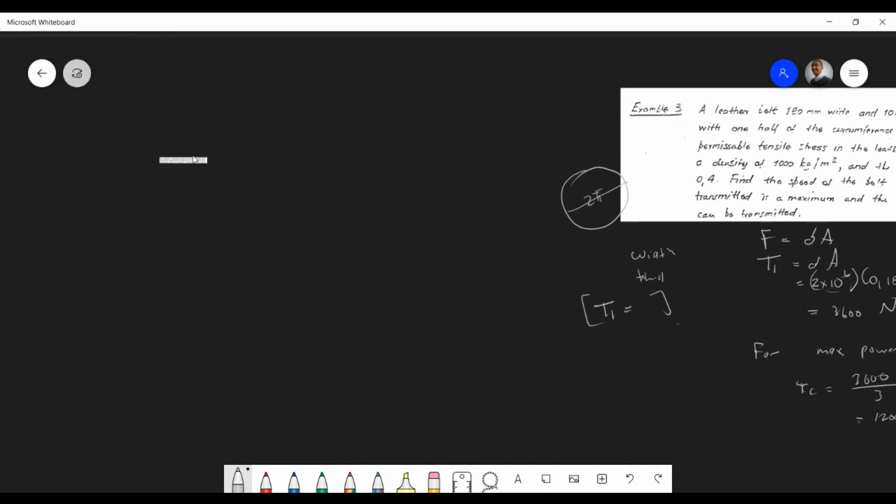Okay, this is not with maximum power, but I wanted to give it to you after the other one anyway. But I realized I'll probably have to continue on Monday again, make the first session basically. So this is also in your notepad, obviously. And the mass of the one - okay, cool.

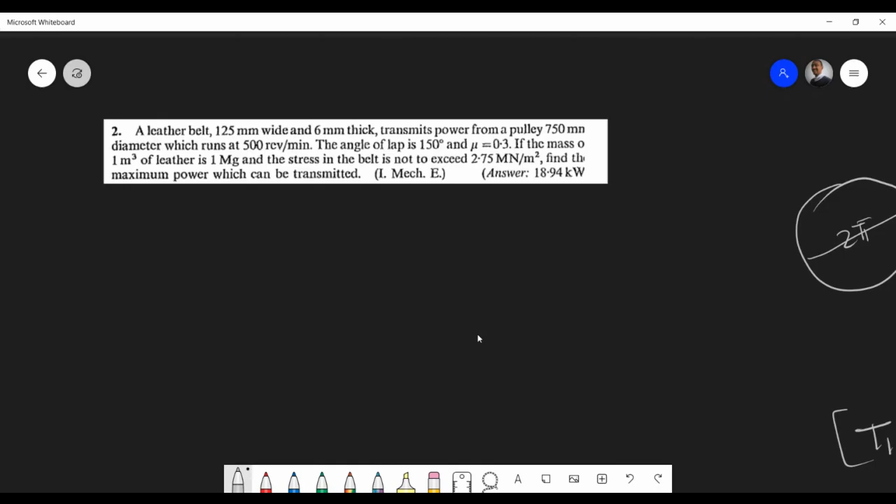This is a very good question. I just want to see what's the same one. Yeah, so it's just 2.75 megapascals, that's just meganewtons per meter squared. And then, of course, rho is essentially 1,000 kilograms per meter cubed, sorry, and yeah, that's basically all.

So what I want here is to find the maximum power - oh, it is part of the maximum power. Strangely enough, find the maximum power, which, yeah, it's weird. Okay, I think a question here is find the power at normal conditions, and then find the maximum power. I don't know, it's quite weird - find the maximum power. Okay, I'll give you guys 15 minutes and then I'll step in on this.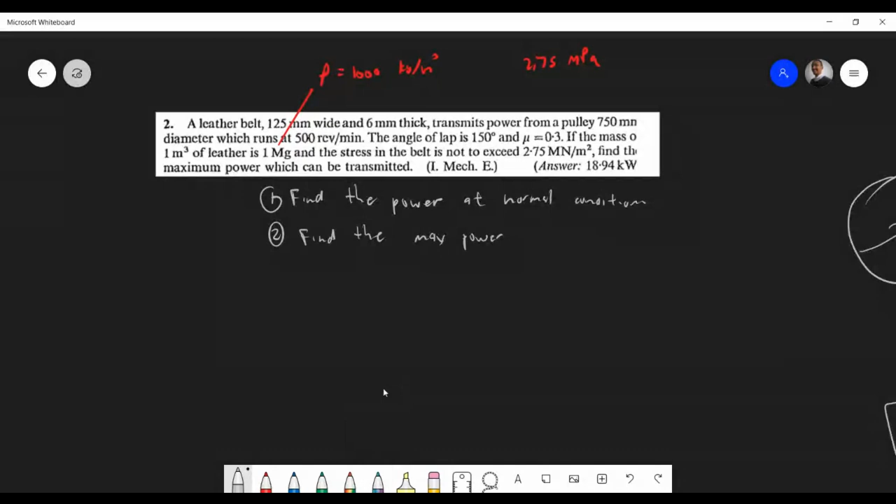So I see the power at normal conditions first, right, and then maximum power. Okay, remember, I just did this literally now - T1 is stress times area. So they're giving us the maximum allowable stress for the belt, that's 2.75 megapascals, right? That's a material limitation, times the area, which is 0.125 times 6 millimeters. Now remember, this answers for the maximum power transmitted apparently.

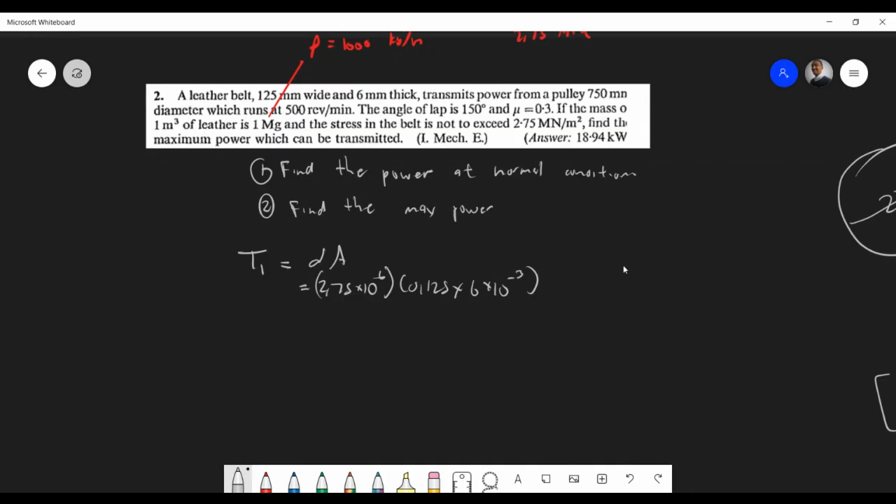I'm just looking at that - I just gave you the normal condition as an extra. Maybe the question wasn't clear, right? I think what's next, I think the powers are the same. The powers are the same. Oh, but maybe, yeah, so it shouldn't be the same, yeah, but maybe it's a mistake on my end. So we can just call it the maximum power, right?

Anyway, so TC will equal - oh, let me just get that answer first. 2.75 times 0.125 times... what's your tension? 2062.5 newtons. And then 2062.5 divided by 3 - this is a practice problem - 687.5 newtons.

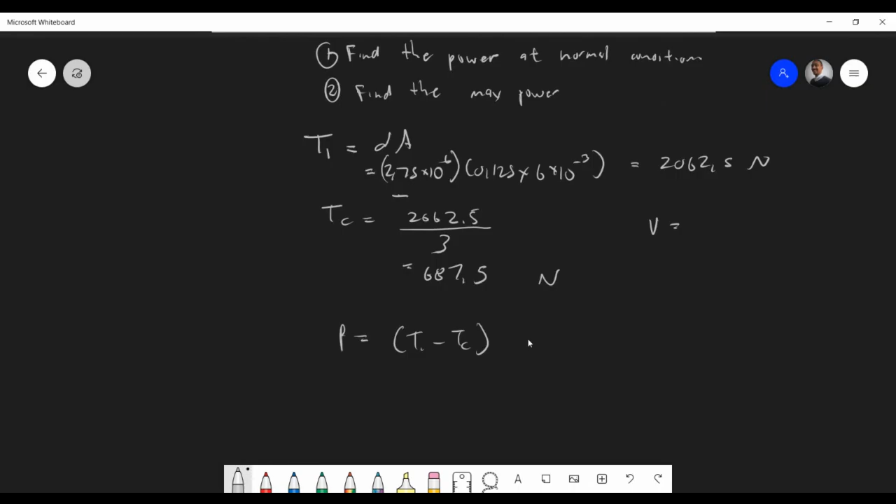Do we need the velocity? So, although on the maximum power, okay, so we've got that. So the power is going to be T1 minus TC, 1 minus 1 over E to the mu theta, times velocity. And so T1 was 2062.5, so much minus that, it's the same basically. And 1 minus E, so what is our mu?

Our mu was 0.3, angle of lap is 150 degrees, which you have to convert into radians. And that's 2.6179 times your velocity. So your velocity was given as pi times 500 revs per minute times 0.75 over 60.

And then, oh, so is that the maximum? See, this is what I was thinking. So this is your normal velocity here, I just want to make sure. So the minus term is, do you get the same value? 19.63 meters per second. And for your V max...

Remember you can take TC divided by M, is that not so? Are we also there, students? Yes, sir, I'm here. Yes, here, sir. Yes, I'm here, but not. Yeah, but we must...

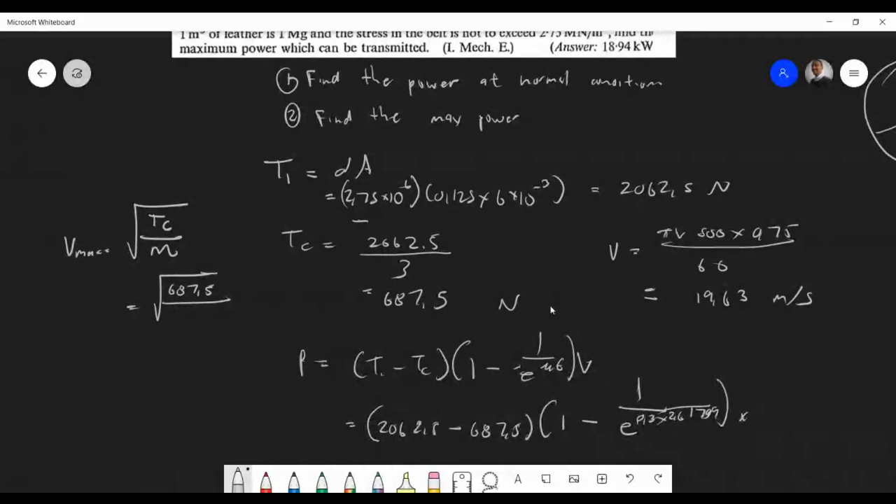We use the 19 - I don't know, for the correct answer, the 19. Okay, that's fine, that's good, I'm just checking now.

So you'll step back and do the analysis. So mass is density - so density is, that's density there, it's 1... times, oh no, whoa, what's this here? 1 megagram - is that the mass? If the mass of 1 meter cubed of leather is 1 megagram, what does it mean?

I think what's supposed to happen there, I'm looking at it now. This is problem 2. The density is going to be, it's supposed to be 1,000. Oh I see, it's 1,000. Don't know why it's so vague, it shouldn't be like that. 1,000 times 0.125 times 0.006, that's 0.006.

And the mass should be, sorry students, it's the problem from the book, but it should be 0.75 kilogram per meter. Sorry, it's worded very poorly, I should have put in the other one. Just forgive me for this. It's not difficult, it's just worded crap in this book, it's an old book. It is the volume, sir.

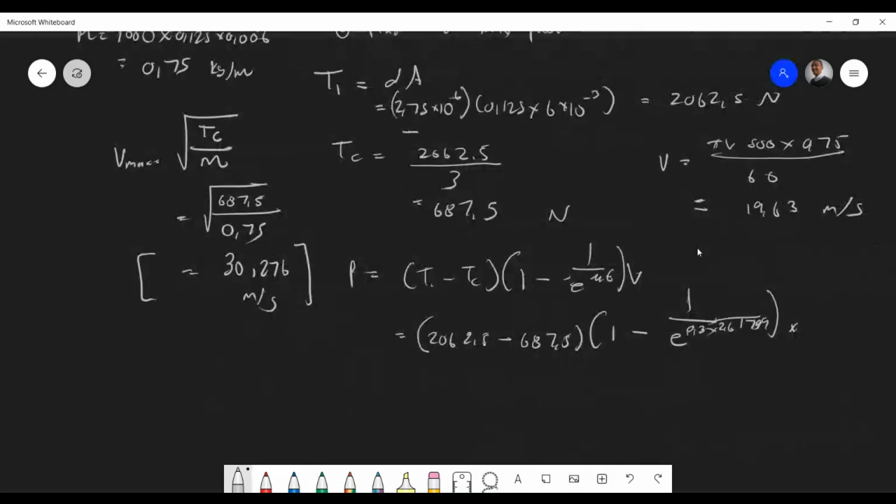Okay, yeah, no, this is so. 687.5 over 0.75, and the maximum velocity is 30.276 meters per second. So there's Vmax. Of course, all you have to do is change the velocity over here. So for 19, you get 18.94, right?

Is that correct? Is that correct, students? Not exactly, but closer. Okay, it's 18 point... what's it?

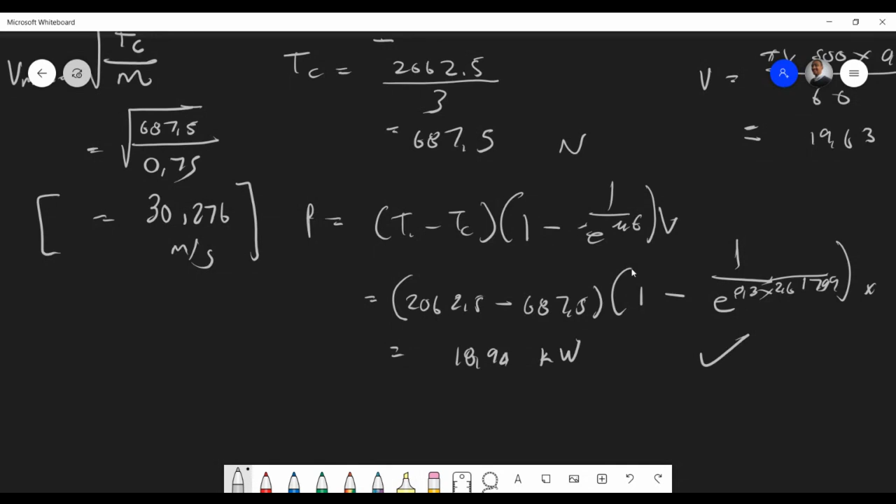You see, here's the actual problem in your notes, that's what it actually looks like. That's the same thing, but I think they made a mistake in that book there. I don't get that. That's the same, so let me just shift that on top here to avoid confusion, so let me just quickly verify what I'm saying here.

2062.5 minus 687.5, 1 minus 1 over e to the power 0.3 times... what's that... 2.61799, close the bracket, times velocity 19.63. So yeah, for this I get 14.

14.68. So this is V mean, right? Operating one. And for V max, I get 30.276.

Yeah, I find it quite strange, I'm not getting the right answers here. I get 22.649 kilowatts, so I'm not sure. Students, where did I make a mistake here? Can you guys pick it up? I think it's to do with the centrifugal tension.

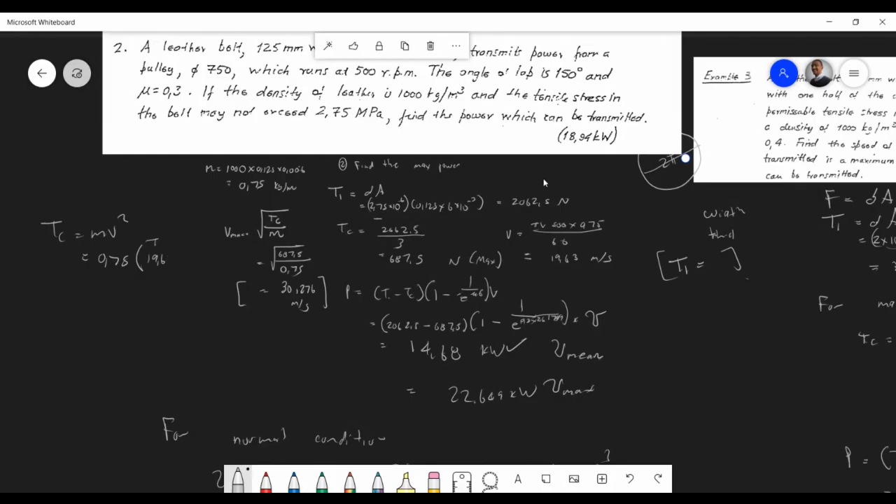See the question is changing, man. It's the same question, but I'll show you now. So can you see in your notepad, it just says find this power which can be transmitted, man, you see here. But in the actual question I sent before, it says max power, you see there for the same answer. So this is not right.

So let's see for max power. So of course you do that. The velocity you should get is now 30.276 meters per second. So now let's see if it's the same.

Jason, maybe it's the same. 2062.5 minus 687.5, 1 minus, exactly the same thing again. What's important is just to understand what is maximum and what is not maximum. So if you can walk away with that, you've achieved, you've met the objectives of this particular section.

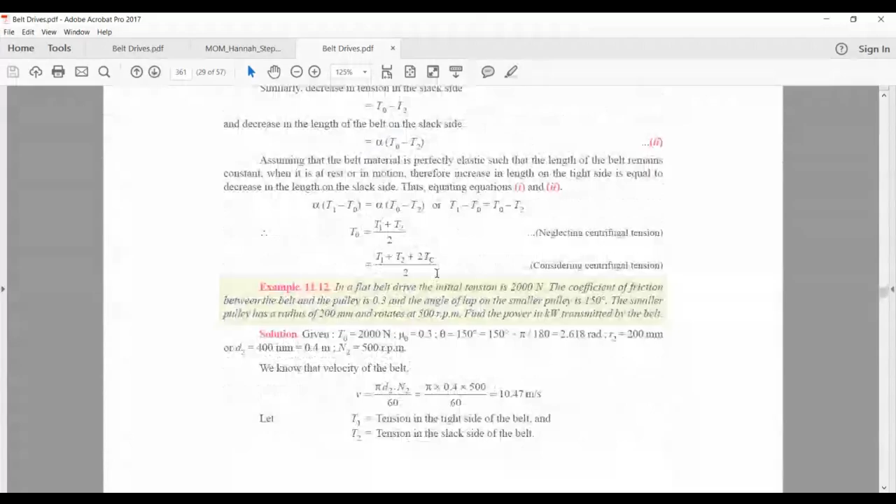I think on what I'll do on Monday for the first session, I'll just conclude belt drives, but all that's basically remaining, students, is just V belt drives. So maybe I should just quickly share that with you and sneak it in here. It's not going to take a long time, but I will go over it again. I'll probably do about 2 examples, I think that's fair.

But all it essentially does is that your equation for the modeling of the tensions, you have now a groove angle. I'm just giving this for information's sake. If you can see the formula, it's e^(mu theta cosec beta). That's the groove angle, and normally we divide that angle by 2. So to give you the full angle, we have to subtract divided by 2. I'm just letting you know that's all it's dividing essentially, and we use it for both V belts and ropes.

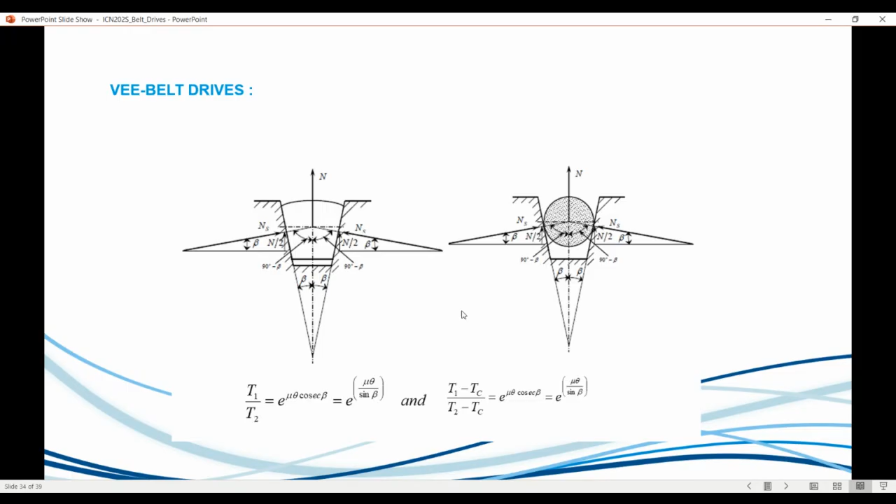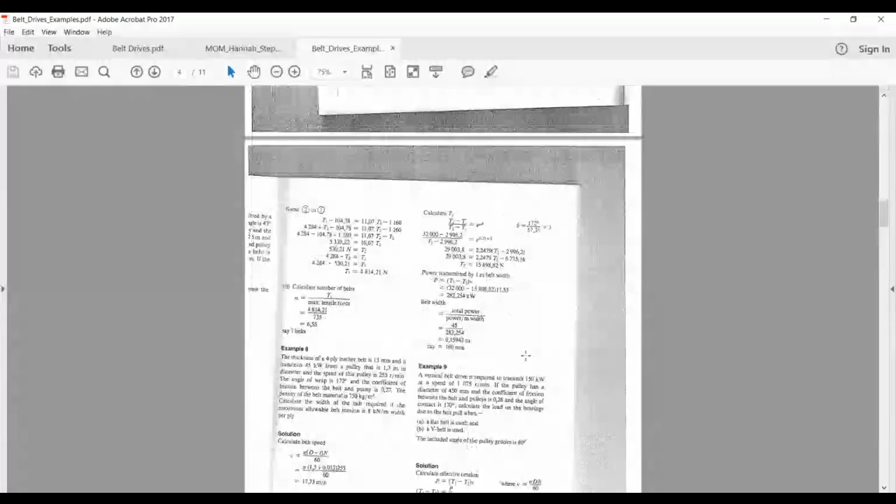I've posted another note just to end that off, show you that as well. And this comes from the Mechanotechnics book N5, I'll show it to you now. Of course, this goes without saying, please go over it. What's cool about this is it comes with solved examples, there's a few of them here. I show you, if you can do all of this, you'll be more than sorted out.

So yeah, you see there, it's got a few of them. Check out the cross belt one, it's nice.